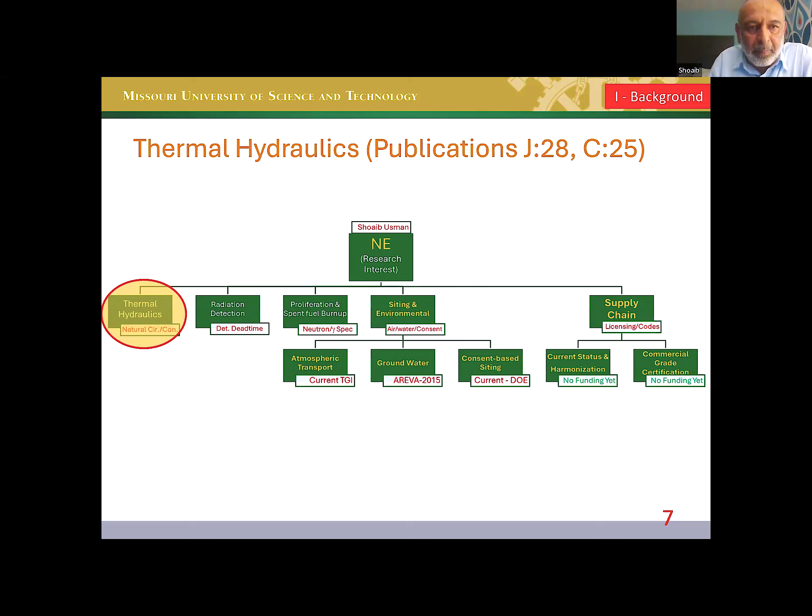This is my area of research. On the top, you will see the number of publications in different areas. Thermohydraulics has been one of my major areas, followed by radiation measurements and detection, and spent fuel interrogation. Both of those involve radiation measurements and improving the quality and performance of radiation detectors. I have not made any detectors myself, but I'm very well aware of their performance.

Another area of my interest is heat transfer enhancement using twisted tape or other techniques. Some initial results: axial temperature profile at the top, radial temperature profile at the bottom.

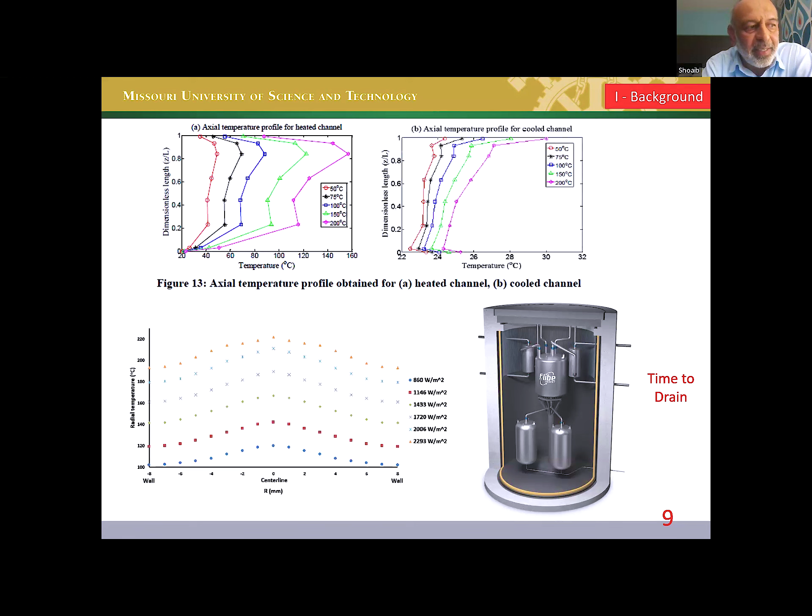Recently we are working on new reactor concepts using molten salt as both fuel and coolant. Our interest is on time to drain in case of an accident. The plan is that from this critical configuration of the reactor fuel/coolant, it will drain out to a subcritical configuration. How long will it take to drain out? That will really dictate how much heat needs to be removed in the subcritical configuration.

The other area is radiation measurements, radiation detection, which is of interest to this audience. There I am more interested in detection dead time, meaning when one pulse, one event, is registered in the system, we will talk about that in more detail. There is a dead time during which another event, another radiation interaction, cannot be recorded. That has influence not only on the count rate, but spectral convolution will take place.

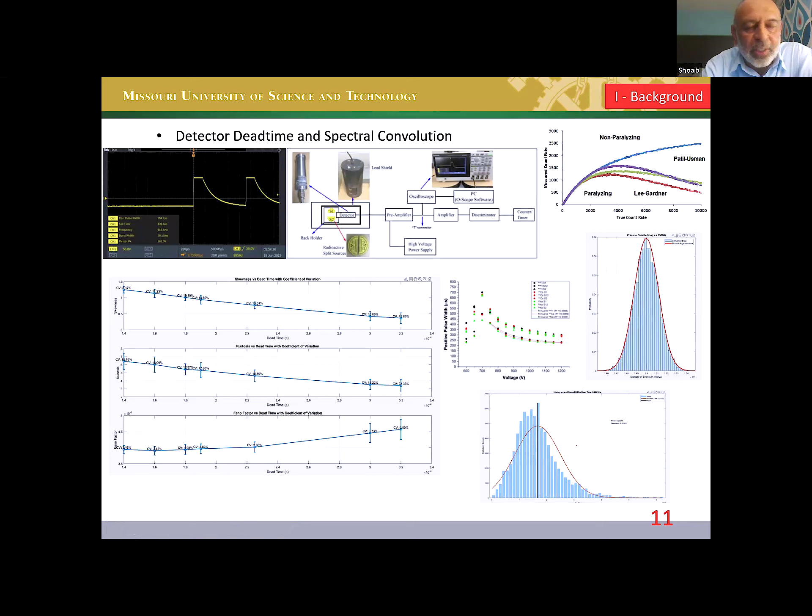So these are some of our results. We have a series of 10 to 15 publications in that area. Most recently, we are working on the statistical degradation of Poisson, so there will be a distortion of the Poisson distribution when radiation events arrive at the detector.

They are ideally Poisson, but as the signal passes through the detector, the preamplifier, amplifier, and thereafter, the Poisson statistics are impacted. Now we are looking at the variation, the change in the mean, kurtosis, skewness, and Fano factor, and how they are being impacted, and from there really predict how many counts are lost.

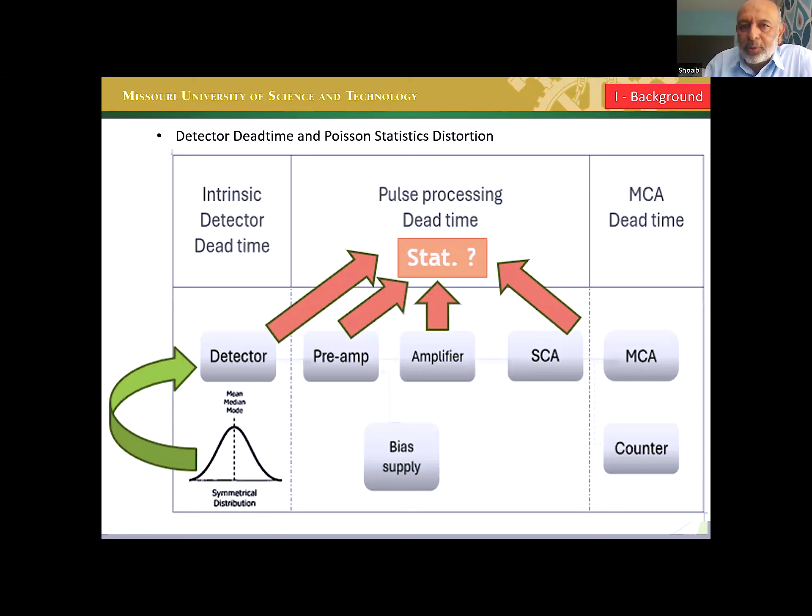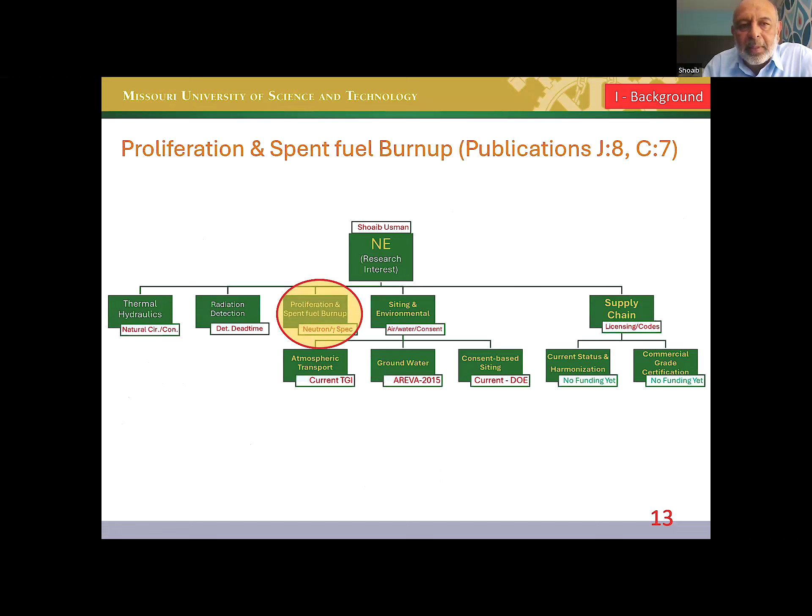The other area is proliferation and spent fuel interrogation, anti-proliferation tool development. These are our results. In the middle bottom picture, we are the first to report multidimensional delayed neutrons. Delayed neutrons are usually reported in 6, sometimes 8 delayed groups, but with no mention of the energy distributions within each group. We are the first to divide each group into its energy distribution.

Some of those pictures are shown at the top. The spent fuel, which was older than the newer one, shows how that spectrum will change, how the neutron energy spectrum will change.

The bottom left-hand corner is showing the core configuration of our campus core and the beam, neutron beam, and the detector at the very end. Using this beam, we were recording the neutron energy spectrum.

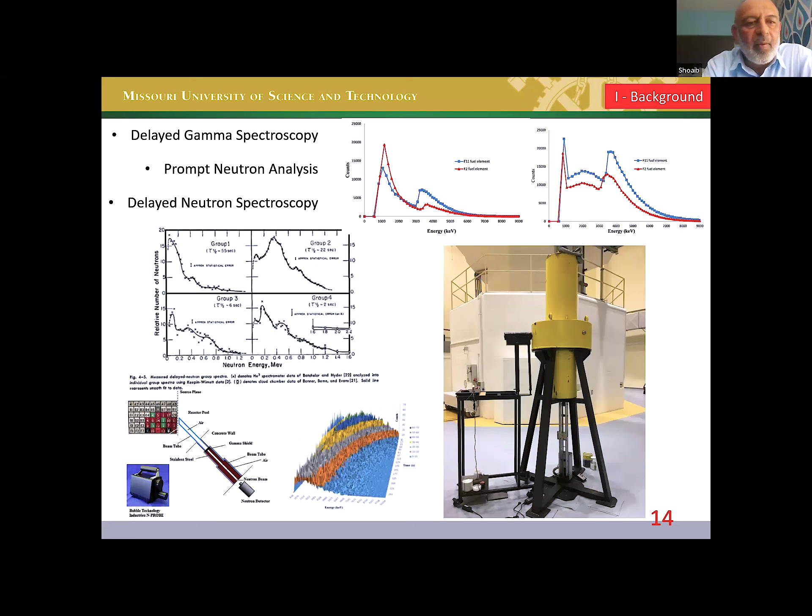So all of those were our capabilities, but fortunately or unfortunately, he left the program and started at our campus as a faculty, Typhoon. So he had to leave this apparatus behind. We will be rebuilding it together on our campus.

The next area is radiological pathway analysis. We are looking at atmospheric transport of pollutants, and surface water and groundwater. My focus is only on atmospheric and groundwater. Here are some of the experiments.

In the US, it is required by the NRC, the regulatory agency, that you collect 3 years of historic data before you can submit an application for a site license.

This means there is an inherent 3 years of waiting time. What we have done is use off-site data from airports and weather stations to build correlations, synthesizing off-site data to supplement on-site data, with very good results. As you can see on top, atmospheric stability is very well predicted.

No more than one stability class prediction difference, except for a couple of points like this one. The bottom right-hand picture is showing the rate of transport of strontium and cesium through groundwater.

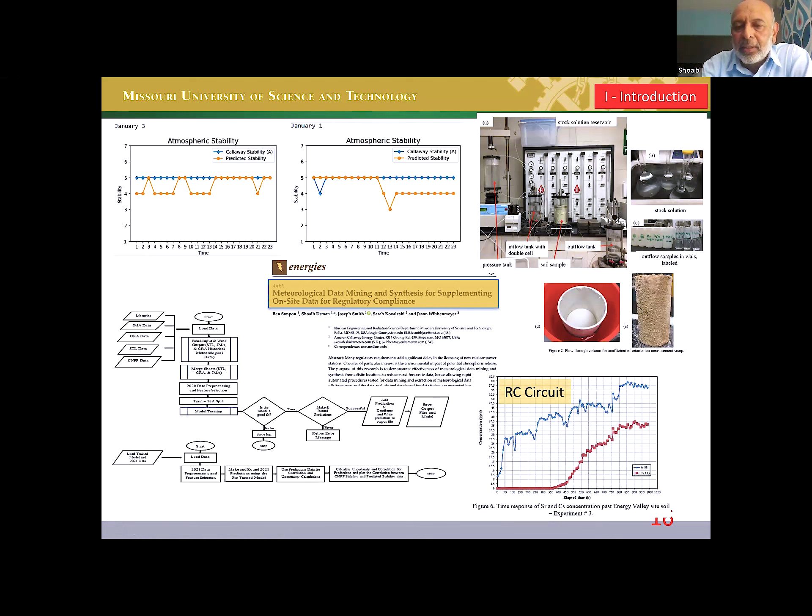What I'm showing in this picture is a typical RC circuit, and we are modeling the transport using an RC circuit analogy. The resistance to transport is the reciprocal of the hydraulic conductivity, and the capacitance of this equivalent circuit is the retardation coefficient, or distribution coefficient, of these elements in the soil and water composition present at that site. So the water chemistry has to match.

My other areas are not really related to measurements, so I'm not going to talk about them, but supply chain and understanding the codes and standards applicable to the nuclear industry is another area of my interest, though I won't spend much time there.

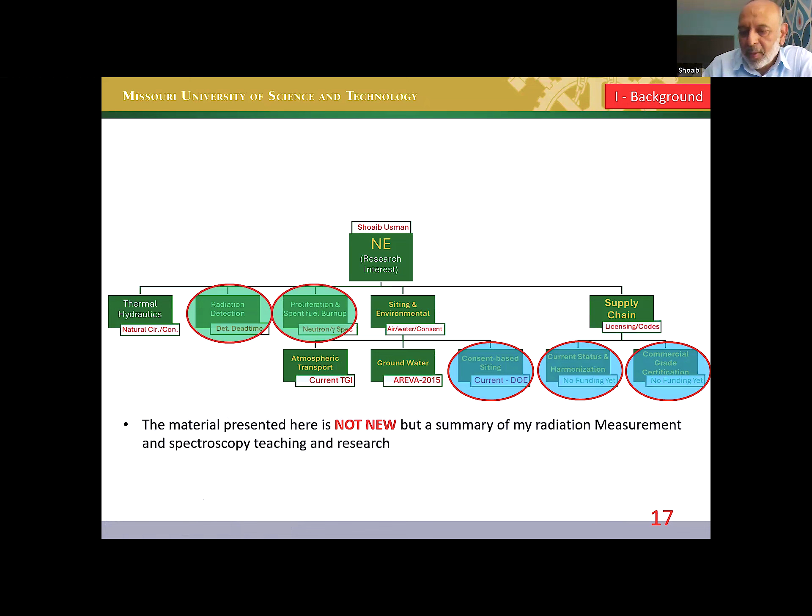Radiation measurement is no different. You need to understand the application, and with that application, the limitations, and then pick the right tool.

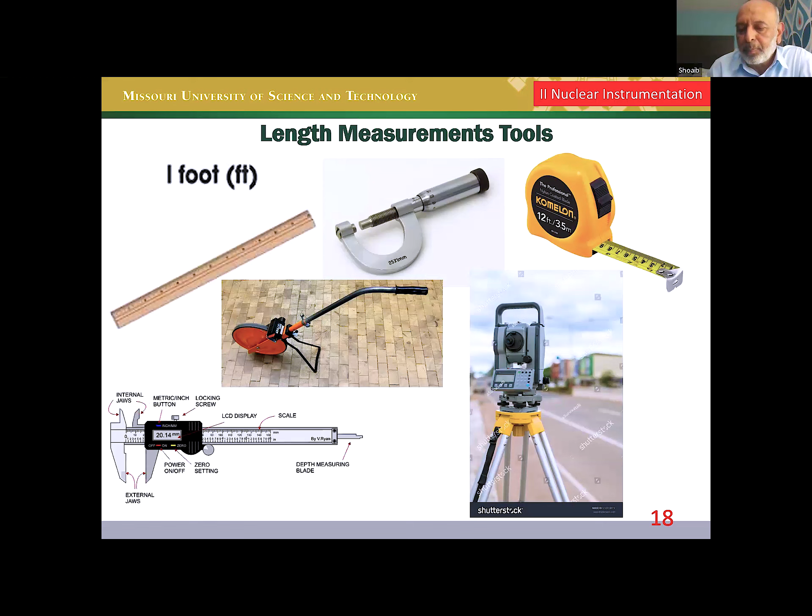I give this example very routinely in my class: measuring by a vernier caliper, marking by chalk, and then finally cutting it with an axe. It makes no sense to use your resources accurately measuring when you cannot mark it well, and marking it accurately has no value if you cannot cut it exactly where you want.

This is the reverse of that, and in all engineering measurement problems, one needs to know the limitation and the choking point in your measurements before you go forward.

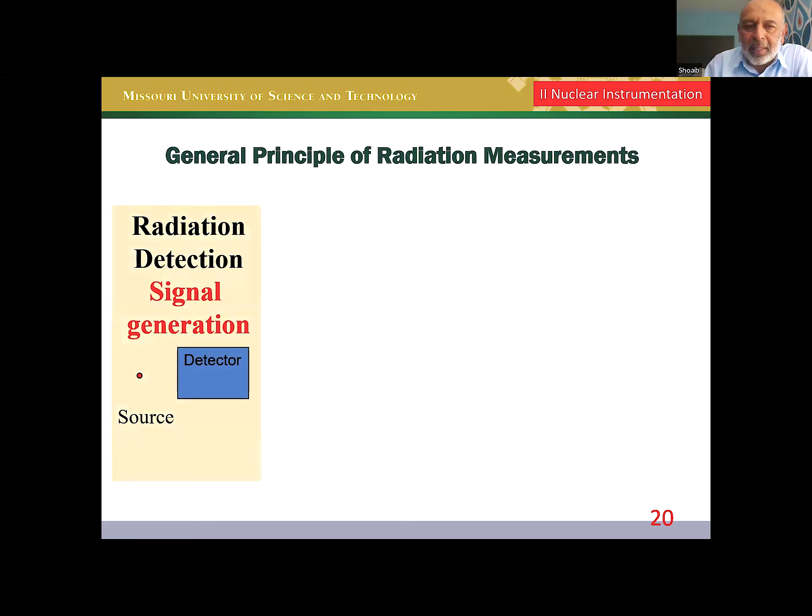So radiation measurements, many of you may know that the first step is the detector itself. Then comes the preamplifier and amplifier, where the signal from the detector is processed, and then recording it either in a counter, a multi-channel analyzer, or observing it in an oscilloscope.

The question is, if I have deteriorated my signal at the very first stage of the detector, there is no way I can improve that later on. Likewise, that's where the example comes that if I need a vernier caliper here, but my amplifier and preamplifier is not capable of supporting such high quality data, there is no gain in spending extra time or money trying to improve a signal which is already deteriorated.

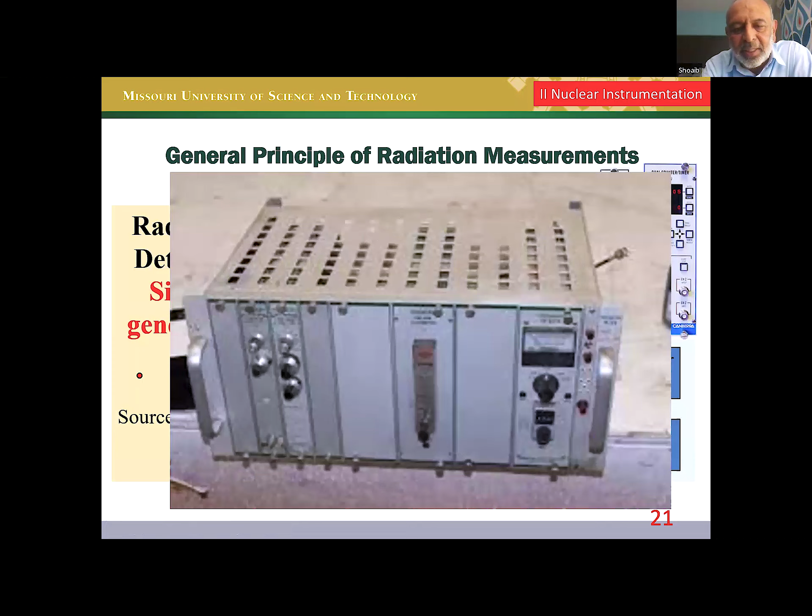So the detector usually generates a very faint, very small looking pulse. There are different choices for the detector depending on what you want it to measure, starting from gas-filled detectors to scintillators to semiconductors, and now there are some exotic scintillators coming. Anyhow, that signal now goes to the preamplifier where it is amplified, and a long tail is added to that.

So this is a tailed pulse after the preamplifier, and then in the amplifier, you try to shape that pulse, and then you take it out, and either you do its discrimination based on the pulse height, and do analysis on a multi-channel analyzer and sort these pulses based on their height, which is MCA, and then count them.

Now the question is, what are the characteristics that we are looking for with radiation detection? Are we just trying to detect whether there is radiation or not? That's the first level. Second level would be that we want to measure the intensity of radiation, meaning how many interactions are taking place per unit time in your detector. So you're measuring the intensity of radiation.

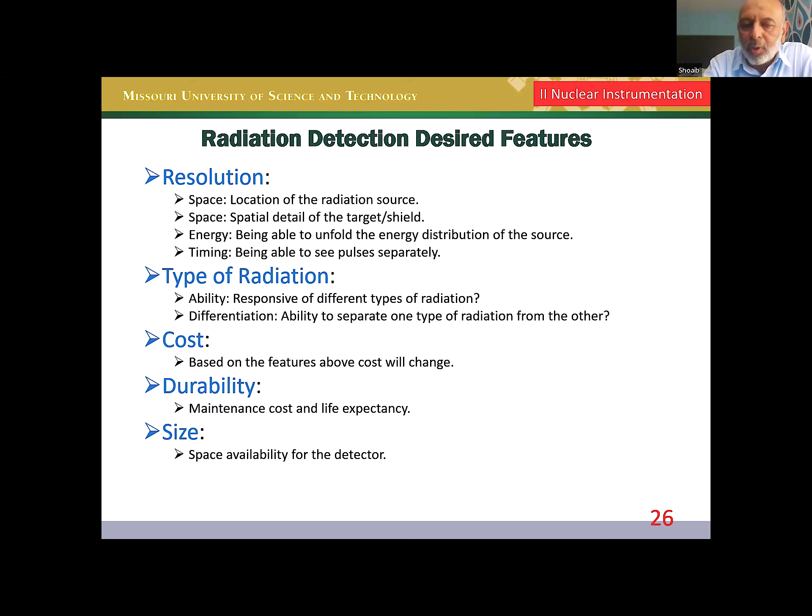So essentially it's an optimization problem. And like any other optimization problem, you do not solve the puzzle by looking at one side only. You will have to pay attention to all sides simultaneously, and their relative importance may change based on the resources you have available and the results you want to achieve.

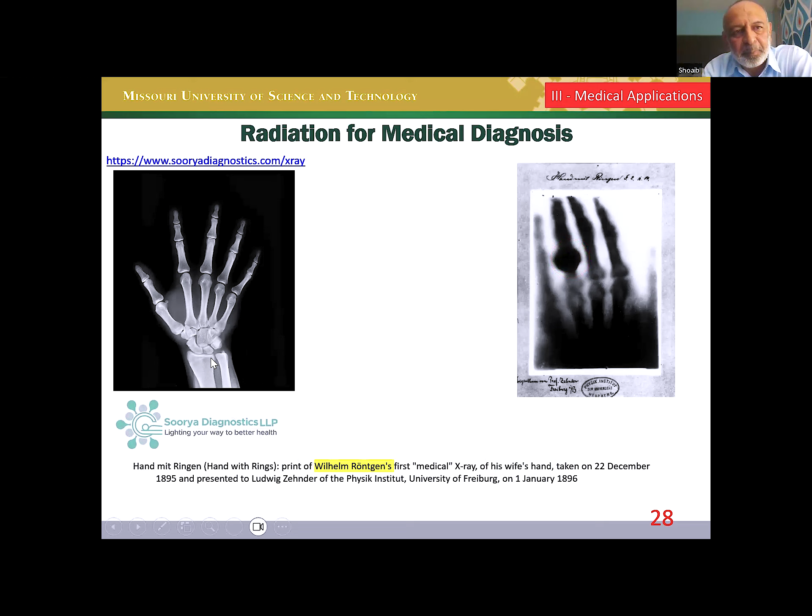Let's move on. So this level of spatial resolution is now improved into this, and you can tell the world of difference in the spatial resolution from the first picture to today's X-ray. And this is, of course, a picture. As an honest scholar, I would like to give credit to where these pictures are coming from. So, spatial resolution improvement.

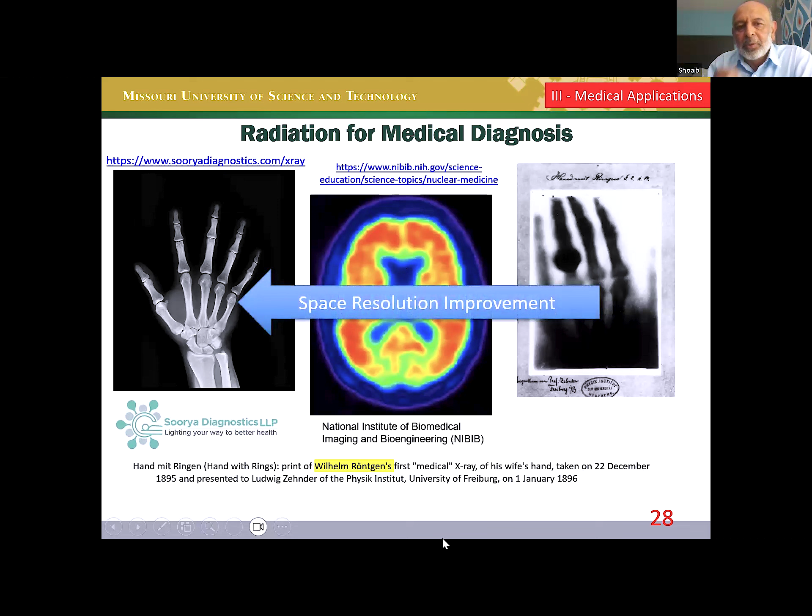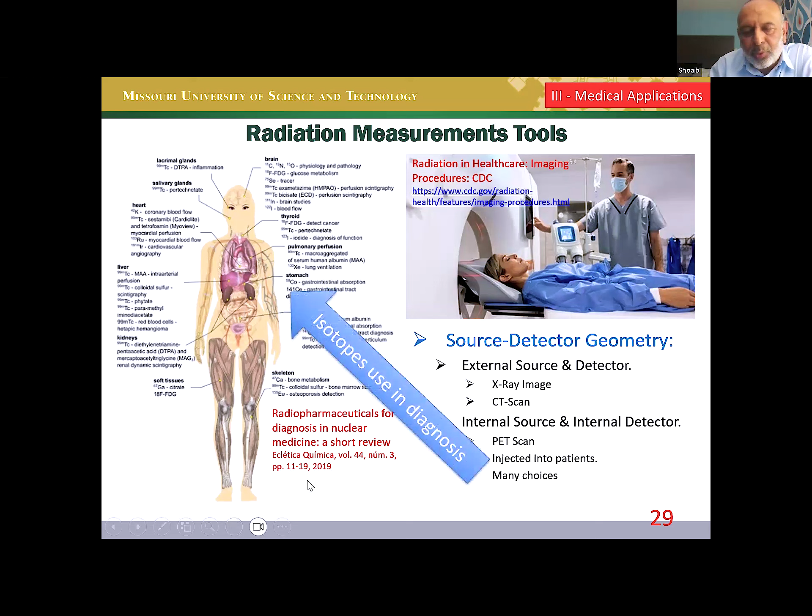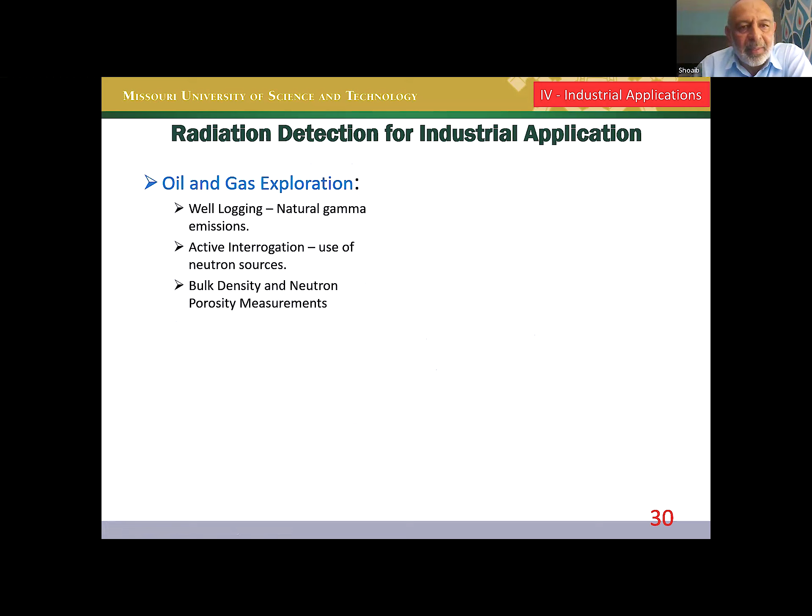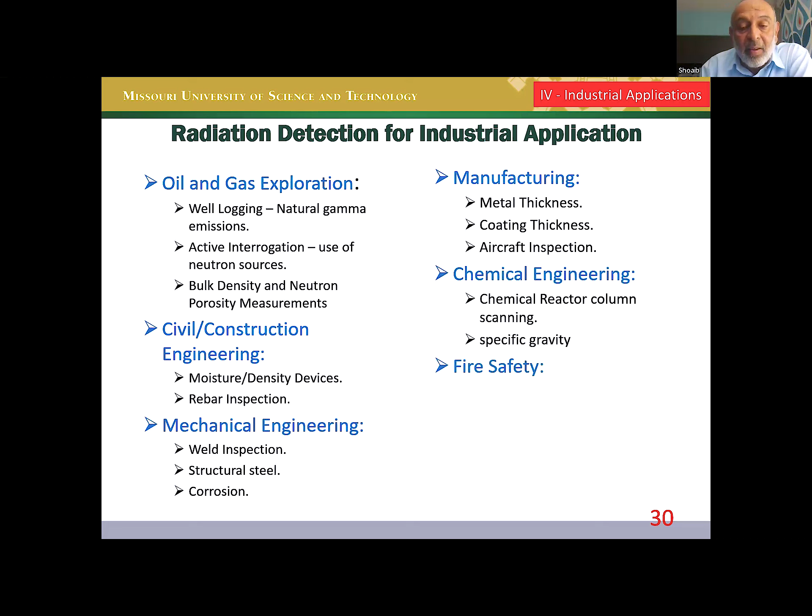Industrial applications, before we go to the reactor itself: oil and gas industries use it for well logging, active interrogation using neutrons, bulk density and neutron porosity measurements. Civil engineering, we use it for moisture contents and rebars in RCC construction. Mechanical, we look at welds using radiation, structural steel, corrosion. For manufacturing, we look at metal thickness, coating thickness, aircraft inspection. Chemical industry, we look at chemical reactor column scanning and specific gravity of their chemistry. Fire safety, smoke detectors have radiation in a detector. Cargo, you've all been to the airport for screening there, customs and arms control. So these are the industrial applications.

As an example only, we want to look at nuclear reactors. The reason I'm talking about nuclear reactors is that I'm most comfortable with that. We have a reactor on our campus, and I have been teaching reactor labs for over two decades. So I will talk about that specifically, but I also teach classes on nuclear power plant licensing, so commercial reactors, what do they use. Then we will have some time to discuss the potential for developing new detectors, or at least using existing detectors, in a country like Pakistan.

Fission chambers, as the name says, fission is caused: neutron causes fission, and we count the pulses generated. Essentially you have fissile material next to the wall, radiation comes in, neutrons cause fission, one of the fission fragments goes into the gas, causes ionization there, and a pulse. Since the pulse is coming from a fission fragment, there is a lot of energy, roughly 100 MeV as opposed to a few MeV for gamma, we can draw a discriminator line so that only pulses above this pulse height will be counted, and you're only counting pulses generated because of fission.

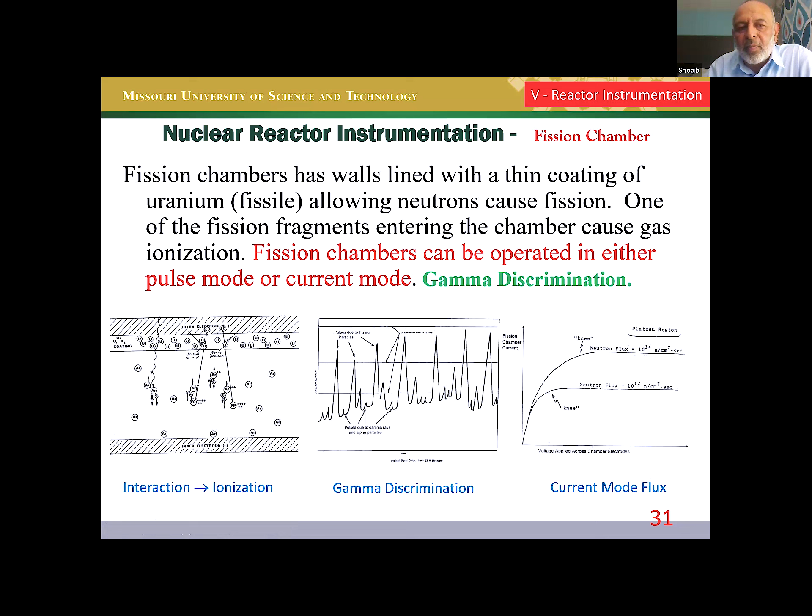In most cases, you use a fission chamber for startup in pulse mode, and then you move it away because you want to preserve your detector life when it is at full power.

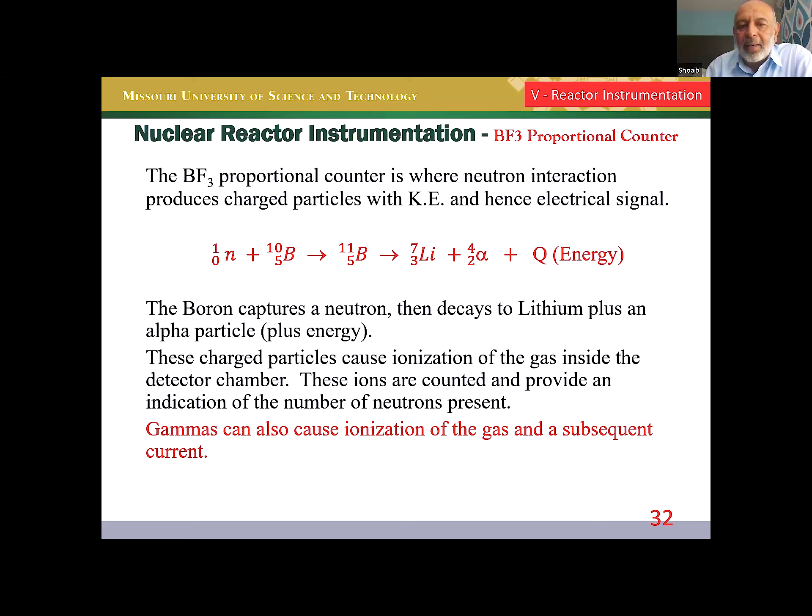This is the interaction taking place in a proportional counter. You have boron, in this case BF3 gas, interaction taking place there, and lithium and an alpha particle coming out. The alpha particle has some energy, it will cause ionization of the gas, pulses are generated, and you count that or operate it in current mode. Gamma can also cause ionization there, and there is noise because of gamma.

Now, ex-core instrumentation, meaning outside the core, not between the fuel elements. What are the options? You monitor neutron flux outside the reactor vessel or core. Initiate alarms and control signals rely on that. These are your ears and eyes in the core, telling what is happening there, and you rely on that in all decision making about the criticality and behavior of the reactor, relying on the signals you are receiving.

It provides necessary overpower trips in commercial reactors. So if there is an issue, there are statistical tools available where you start changing the weightage coming from different detectors, with the idea that if repeatedly there is a sudden change in that signal, you discount that signal.

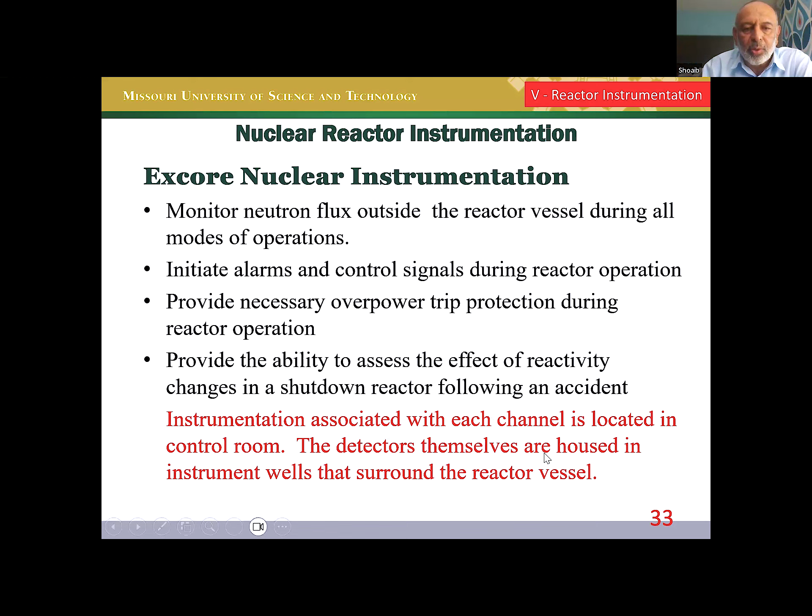So instrumentation associated with each channel is located in the control room, and you make measurements there for different stages of reactor operations, which means source range when you're just starting the reactor, intermediate range, power range, and finally wide range. I hope I'm not going over my time limit.

Otherwise, I can accelerate my discussion. You have six more minutes to give your presentation.

For source range, you usually use something in pulse mode. There is still a significant amount of gamma present there, so what you would do is ensure that you can discriminate against gamma.

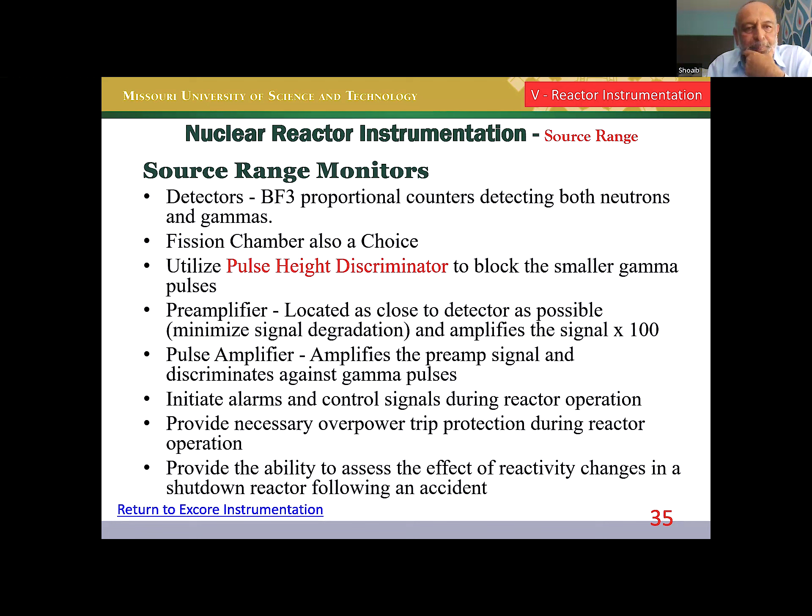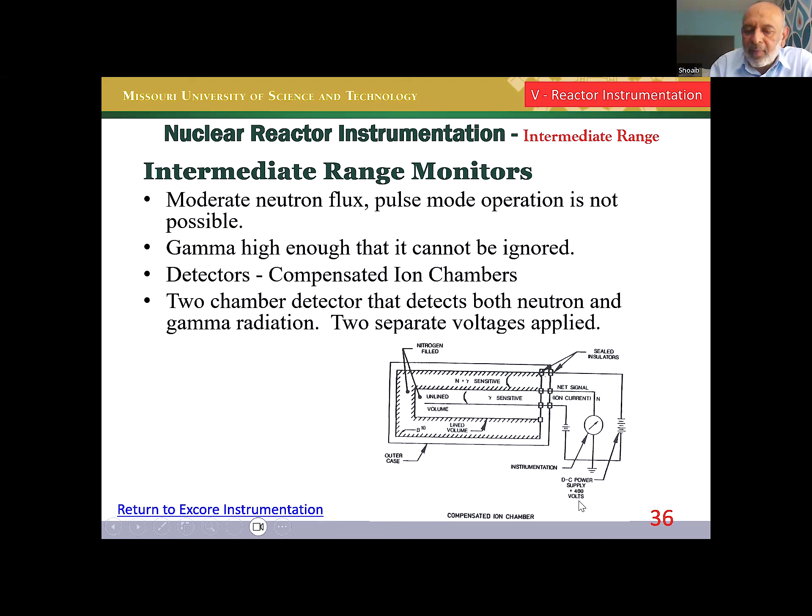In the intermediate range, there is significant gamma, but the neutron count rate is so high that you cannot operate it in pulse mode. So you would rather use it in current mode, and yet you need to discriminate against the gamma signal. What you do is put a compensated ion chamber where one of the detectors is lined with neutron absorbing material and the other one is not, and you subtract the current from the neutron plus gamma. The gamma current is subtracted, and this gives you the neutron intensity.

I'm not going to go into details of the operating voltage, but these types of detectors are called compensated ion chambers. For power range, neutrons are the significant component of the radiation and gamma becomes insignificant, so uncompensated chambers in current mode are commonly used.

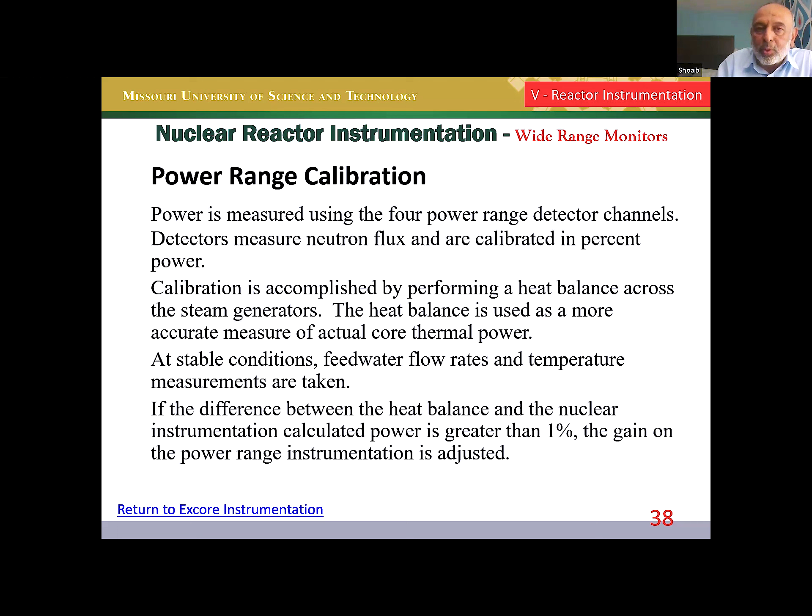Now you will have an array of that in commercial reactors. I will not go into the details of how they are distributed outside the core or within the core in some cases. And wide range, you want to cover 12 orders of magnitude variation.

I'm sorry, I'm going a bit faster. Wide range of operation signals: you can operate in both pulse mode for some level and then current mode, splitting the signal to drive the signal processors.

Now coming to the general area of what we can do in Pakistan. First of all, we need to know which area is already developed. Are the electronics well developed? As I said very early on, we don't want to be measuring with a vernier caliper, marked with a chalk, and cut with an axe. We don't want to do that.

So, assuming that all of this is well developed, then we want to know what is the need in this area. Is it reactor instrumentation, medical instrumentation? And then based on that, that type of detector needs to be developed.

So gas filled detectors are rather crude detectors. The type, the control on the gas composition is what matters, of course, along with the purity of the central electrode and the walls, making it stable.

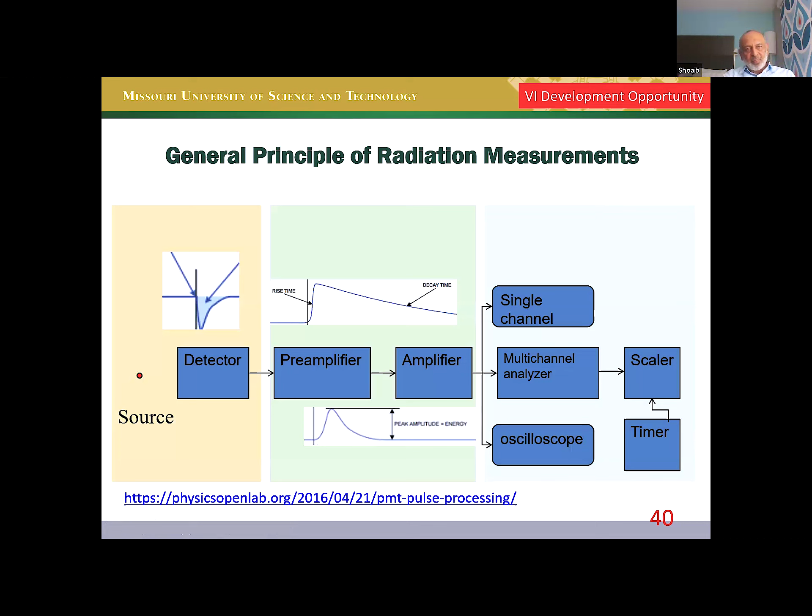If so, what is the quality of that? And what is the status of detection development? I don't know, but I'm very willing and enthusiastic to help in that process. In fact, I have visited NED several times to start a health physics program or medical physics program.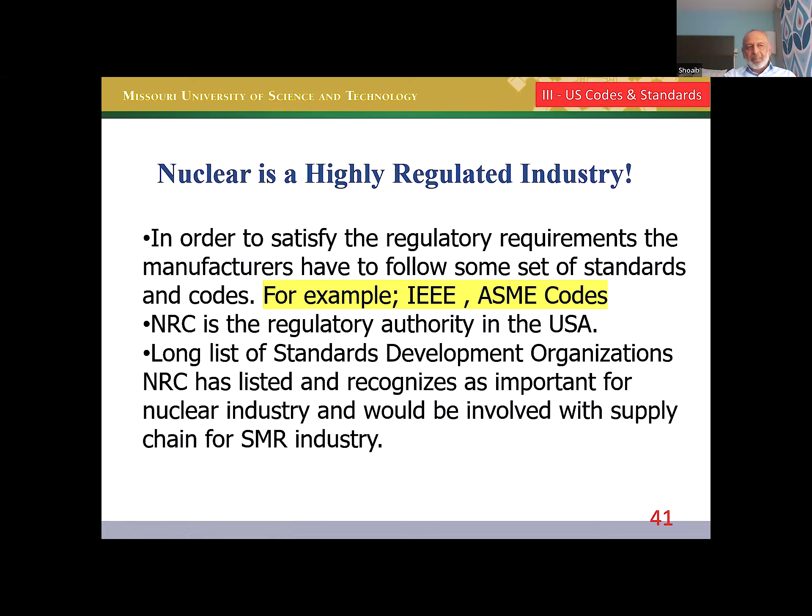These are some of the regulatory and standard development organizations. IEEE will play a significant role here.

But the most significant for me in 2024 was that we were blessed with two granddaughters, Yusra and Rayana, and these are my motivations to continue working and producing things. I want to leave a better world behind me for them.

So with that, I can conclude. If there are any questions—I'm sorry, I went a little bit too fast after asking the question, since I only had 6 minutes.

I wish we could hear you over 2-3 hours continuously. However, it was really great to hear from you and learning on radiation measurement and instrumentation. Thank you so much, Dr. Shoaib.

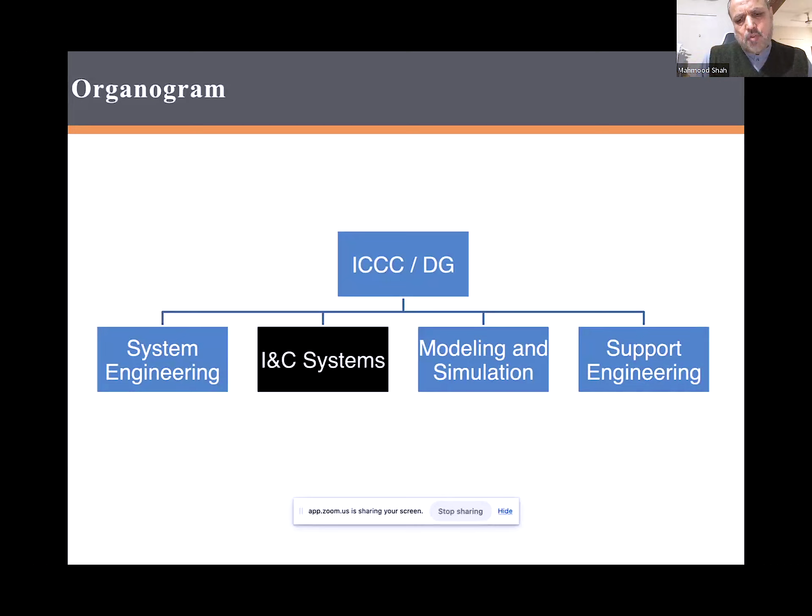Now coming to my directorate. System engineering is primarily focusing on robotics, some artificial intelligence, and they have significant contributions on our plants. Modeling and simulation includes the full scope training simulators for our nuclear power plants at the Chashma nuclear sites, which are our flagship projects. Support engineering is one of the directorates that plays a pivotal role supporting all other directorates for mechanical works and electrical works. But there are two key areas that will be of interest to the audience that I will talk about later in this presentation.

When it comes to my directorate, I'm Mahmood Shah, Director of Instrumentation and Control Systems. I have two deputy directors and one project director at the remote site in Chashma, at the Chashma nuclear power generating stations. Industrial control systems and plant automation systems look very similar, but they have distinct portfolios because we have a great number of projects, so the projects are divided horizontally and every division plays its role. In the electronics division, under the Deputy Directorate of Instrumentation, we are developing some indigenous products, very latest products based on FPGA, which we will talk about later in this presentation. And in process instrumentation, we deal with the measurement of pressure, temperature, flow, level, pH, conductivity, and so on.

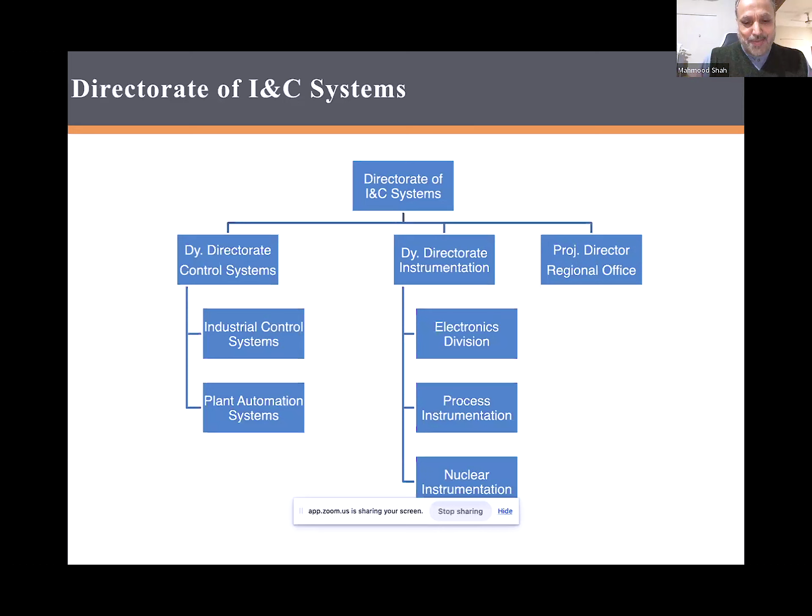Luckily, one of our divisions is nuclear instrumentation, and that will be very beneficial for Pakistan if we can have some connection with Dr. Shoaib. The field he's working on is very prestigious and very demanding for Pakistan. If the atmosphere allows—because we are facing some embargoes in this sector—we would request the university, and later on we will try our best to establish some connection, please.

Going first, our mandate—the mandate of my directorate: CNPGS Chashma Nuclear Power Generating Station and Karachi Nuclear Power Generating Stations are the biggest clients of our organization.

On the open side, our nuclear—basically we are a centralized ICCC. ICCC means Instrumentation, Control and Computer Complex. We are a centralized organization providing I&C services, systems, and technical support to almost the whole of PAEC.

On the open side also, we have 3 research reactors—2 operational, one under construction—and we have 4 nuclear power plants operating at Chashma Nuclear Power Generating Station, 1 in decommissioning stage in Karachi, and 2 recently commissioned and in operation. We also have a large number of industrial plants, chemical plants, and some other plants.

The scope covers both systems and services. When it comes to services, we are providing a big number of services. But one specific service I'd like to mention here.

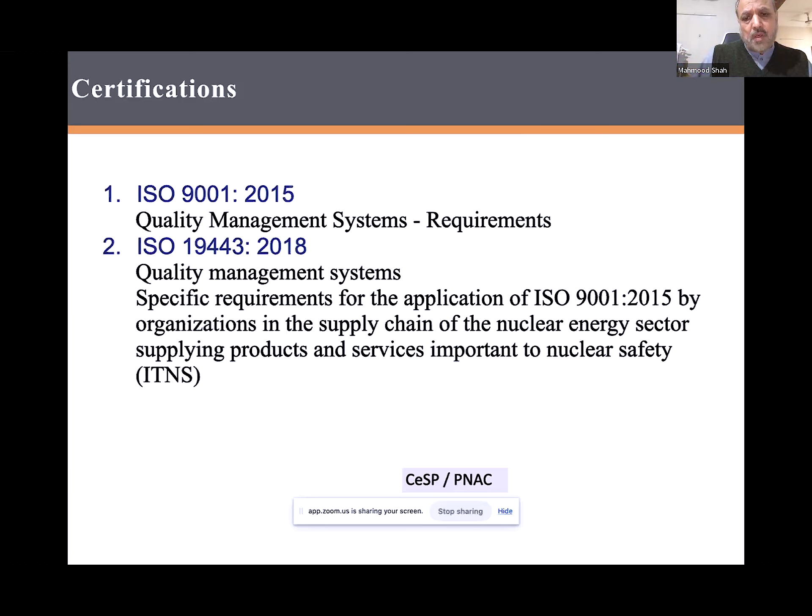ISO 9001 certification has been provided to our organization by CESP, Certification Services of Pakistan. So now PNAC is trying first to accredit CESP for the 19443 standard, and later on CESP will grant certification to our organization for this standard.

Overall, the experience our organization is having, particularly the Directorate of Instrumentation and Control, you can say that over the period of time, over several 2 decades, this directorate has delivered successfully, installed, commissioned, and operated 150 plus systems, we can safely say.

Instrumentation and control systems, particularly based on PLC or DCS, distributed control system, are normally measured in terms of IO, the number of inputs and outputs. The inputs can be digital or analog. When we talk about analog inputs, it can be a 4 to 20 milliampere current, it can be a voltage signal, it can be an RTD, it can be a thermocouple. Similarly, the output signals are also similar.

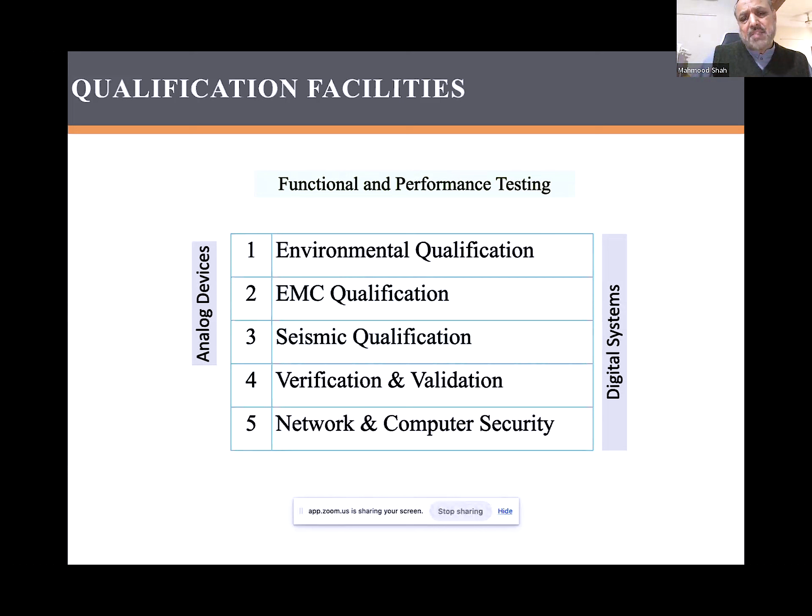Verification and validation, we have already talked about. And network and computer security is the same one we talked about in our previous slide, the cybersecurity. So if the device is an analog device, indicated on the left side, it only goes through the first three qualification tests. Digital systems are bound to go through all five qualification tests, apart from the functional test. The verification and validation, the functional tests, are rigorous and exhaustive.

Now, due to the changing situation in our country, and particularly the agenda of this forum, we have very recently developed a facility which we call FIICS, Facility for Indigenous Instrumentation and Control Systems. In the previous slides, as you see, we are buying some PLC or DCS-based systems from international suppliers like Honeywell, Siemens, Yokogawa, Japanese brands, ABB, and so on. Now the strong emphasis is on indigenous development to have technological self-reliance and independence, and we are facing very serious kinds of international embargoes in this sector, particularly in this sector.

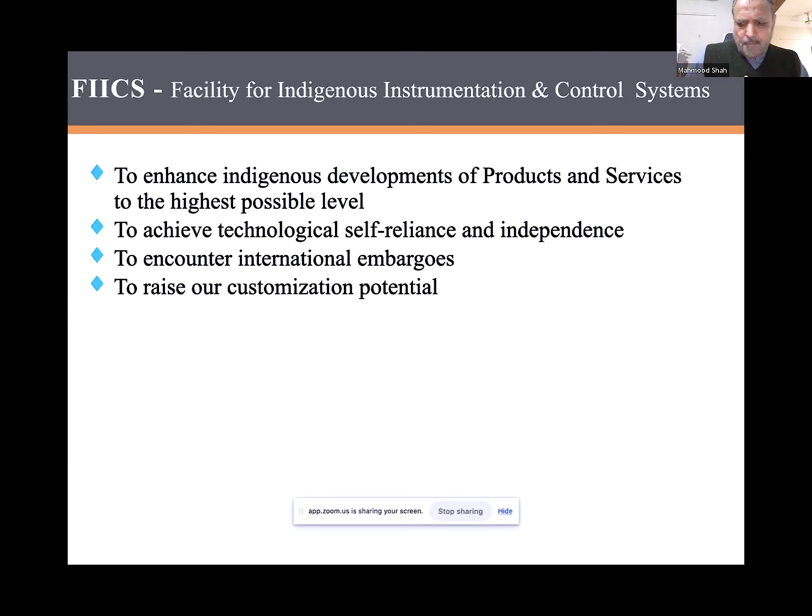Also, there is a thinking in the top management that we should raise our commercialization potential. So far, on the commercialization front, we are not active, but this facility is very recent, and what we are going to apply here is use this facility for customized automation solutions. These are the needs of our various plants - process instruments, for example, process instruments have been on track.

And the first process instrument that we have chosen is the pressure instruments. Pressure instruments, apart from measuring pressure, the differential pressure instrument can be used for measuring flows, and it can be used for measuring levels as well.

When we analyzed the pressure instrument, the different constituent parts, there is a mechanical enclosure. We have a very good sister organization in the field of mechanical manufacturing, one such organization is based in Karachi with the name NEW2, Naval Engineering Workshop 2, Karachi, which is responsible for making very fine, sophisticated, miniaturized mechanical devices or components or enclosures.

We have another one with the name SES, Scientific and Engineering Services in Islamabad, also called NEW1, Naval Engineering Workshop 1. And then we have HMC3 in Taxila, which is responsible for making very heavy mechanical structures. So for the mechanical enclosure of the process instrument, we already have an installed base. We don't need to make another facility.

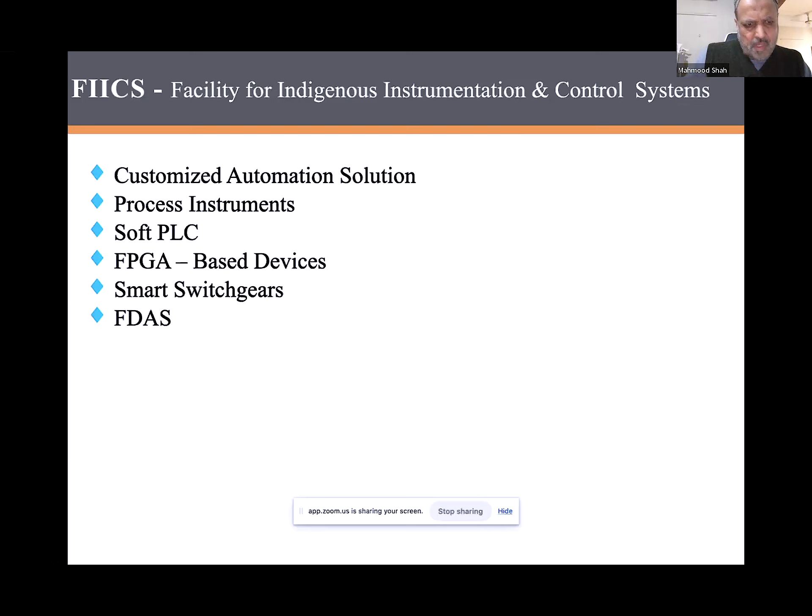This is my second lab. This is the NexSys architecture. On the HMI layer, we have a supervisory HMI software of our own, which we have developed with the name CoLoB, Configuration and Logic Builder operator station. And the data communication network is redundant. The controllers are redundant.

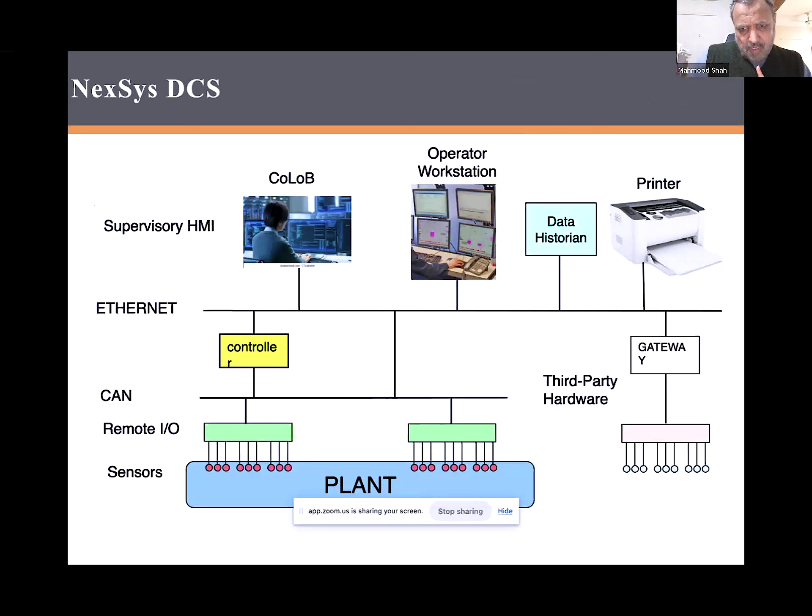And one of our other products is a fire detection alarm system, one of our indigenous products. The control panel with the name SHARQ, and the HMI software with the name SINOS.

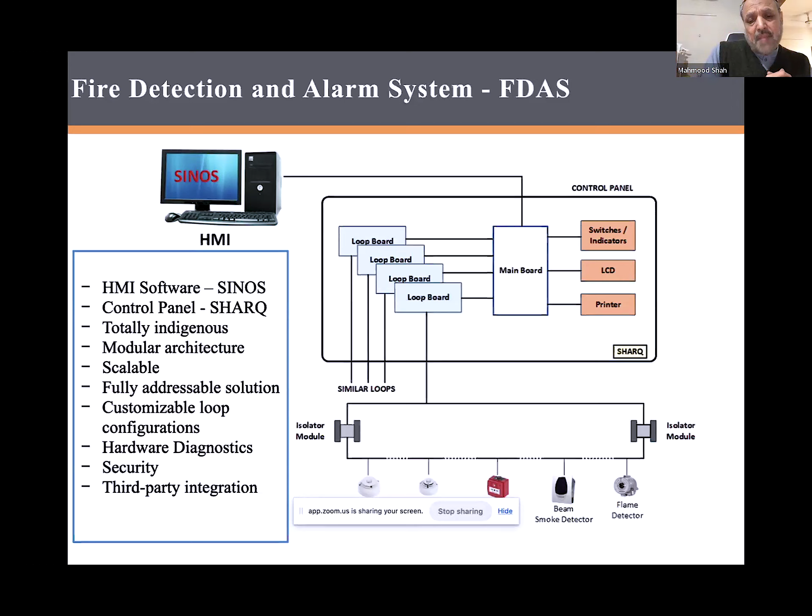So across our whole range of buildings in our state organization, FIICS is responsible for installing the fire alarm and detection system. The detectors we purchase off the shelf, and the control panel and the HMI software we provide from FIICS. Thank you very much.

Thank you. Two questions. Thank you very much. We are open for questions, and we'll start with questions from our president. Sir.

I've got two very important questions for you. Welcome, Mr. Mahmood, we are extremely happy to know that you have established FIICS.

I would like to know whether your FIICS is already established and operational. Number two, whether the facilities are accessible for civilian use. Whether you've got a website, who is heading it? These are the queries that I need answered.

As you know, we are a bit of a reserved organization. We are not very open, but the services are open for the whole of Pakistan. You can approach our headquarters the way you approached for participation in this presentation. We welcome each and everybody that needs it for civilian use.

Yes, anybody can have the facility. The FIICS I talked about is going to be in a lower security category. The process is already underway, and very soon we will ourselves inform you. Anyhow, even at this time, you can avail the facility. Anybody from Pakistan can avail the facility.

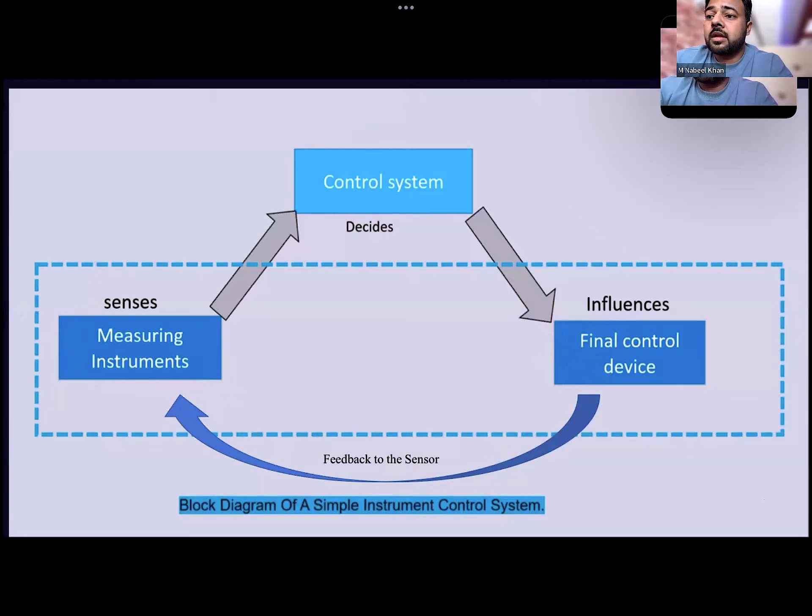More specifically, here's another example of how it's working practically. We have a level transmitter here, which is the sensor, as I was showing earlier in the block diagram, and this is the main parameter we are measuring, the level. Once the level transmitter senses the level, whatever the level is, it will give the output to the control part, the controller, where we give our set point, the desired level that should remain there. Based on that, the controller decides what it has to do. It gives the signal to the final output device and control element, whether it has to open the valve to maintain the level or close it to achieve the certain desired level. So that is the practical example of a level transmitter.

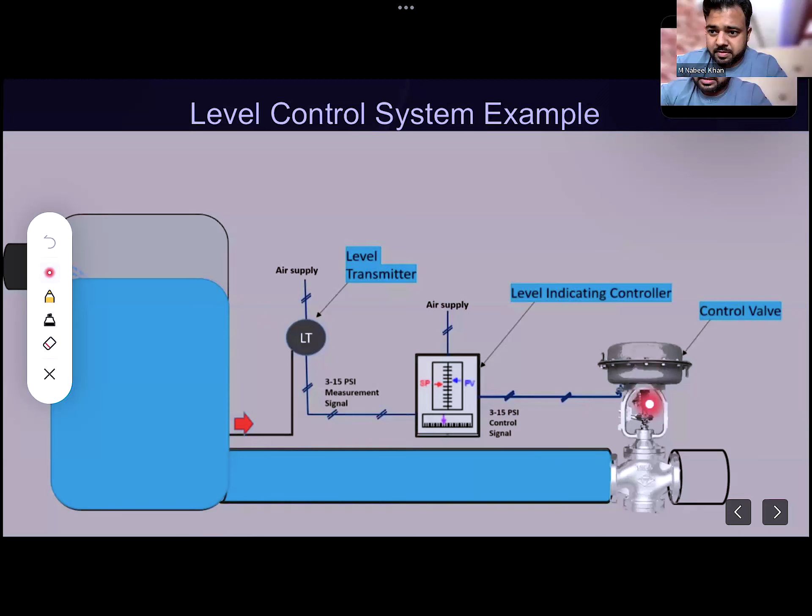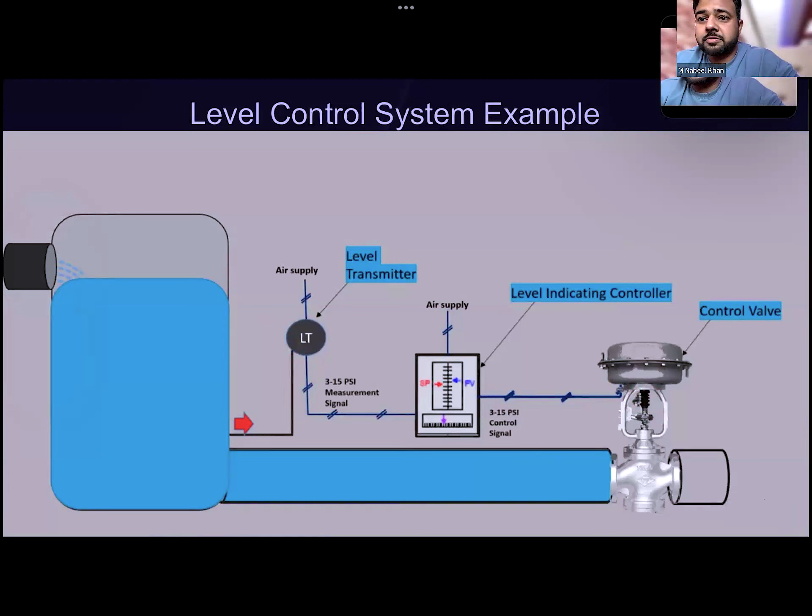Now, in today's world, we have all these things working in a single control device. The transmitter also has the capability to decide and work as a control system, and the final element also has that capacity to work as a level transmitter and directly get the value. But on the fundamental level, all these things work in this way. We have wireless transmitters and these type of things, but they will remain working on this same phenomenon. So this is the basic idea I wanted to add in this presentation before going into detail.

So the question is, who should choose this field? There are certain traits and personality a person should understand before deciding to give his career to this field. He should be passionate about technology, because every now and then we are coming up with new protocols, new devices, and new standards, so he should be well aware of these things. If he is interested in the latest technology, then he can better understand this field.

Then there's another trait I would like to add: problem solving capability. The person should have problem solving capability, enjoy puzzles, chess, and these type of things. If he has interest in problem solving with an analytical mindset, then this field of instrumentation suits him. These traits are a basic requirement for other engineering fields as well, but specifically for instrumentation it is highly recommended, because most of the time on the field you have to come up with some out-of-the-box solution, deploying new control systems to cater to and mitigate risk. These type of things require problem solving capability and an analytical mindset.

However, there are several devices and systems already available. You don't have to invent the new wheel, but you have to come up with the proper solution. That is the challenge we normally face in the field of instrumentation, which I have been facing all this time. So these are the basic criteria or traits a person should have, and then he can pursue a career in instrumentation very well.

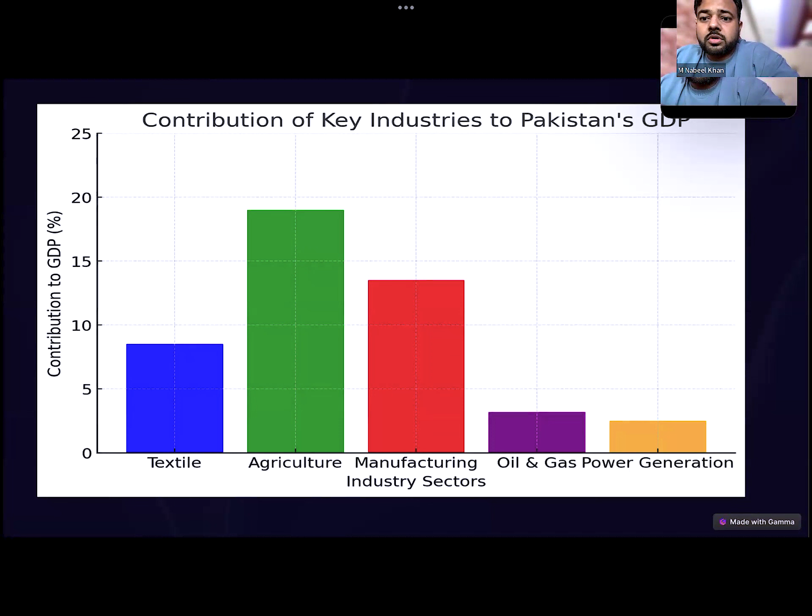We have universities giving specialized programs, like top university institutes. But we have to include projects in our curriculum linked directly with industry, not specifically on a theoretical base. Practical examples and practical projects make students learn more than theory. The programs are available, but universities need to update them and bring specific courses related to automation, cybersecurity, and Industry 4.0. These areas are very important these days.

We need to understand the new standards the world is working on, how data is transferring and working - it's not just about a simple sensor or transmitter. We have to understand what is going on in the world. This will help students' careers as well as help Pakistan's industry if they implement these things. I have no current update on exactly what the curriculum is, but we have universities with a good name working and giving courses for instrumentation engineering.

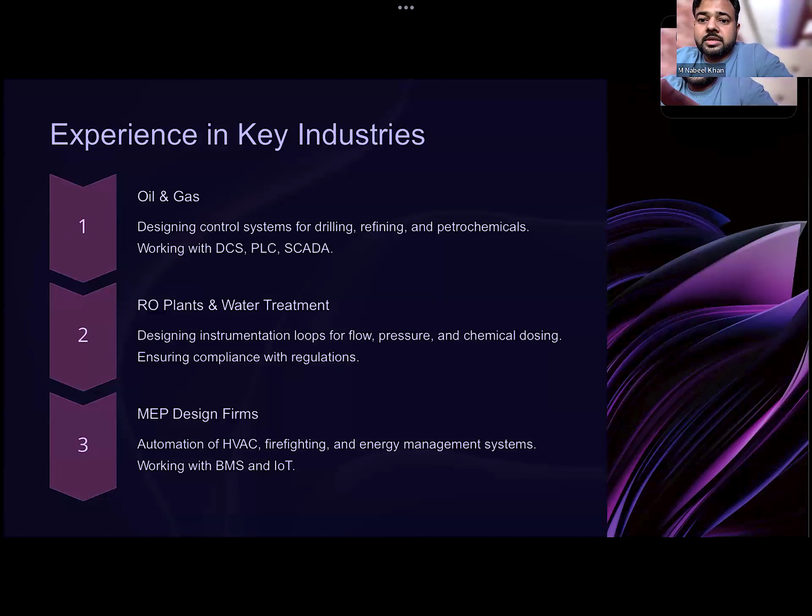This is another area of opportunity for instrumentation, and we have to encourage this domain and deploy positions there as well. Then there's MEP design - mechanical, electrical, and plumbing - and BMS firms. Many buildings have automated fire alarm systems, BMS data, energy efficient lighting systems, and IoT-based building data. These types of automation and instrumentation are also included in building management systems, giving opportunities for instrumentation engineers. These are the areas I have experienced, which is why I included them in this presentation.

So what's next is job roles for instrumentation engineers. We need to understand what roles are available in the market and industry. Starting from a basic technical role like instrumentation control engineer, you can start there, and later specialize in PLC, SCADA, or DCS systems. There are several different PLC brands.

If the industry is working on Siemens-based PLC, that is good for him. He can make himself familiar with the environment of Siemens PLC, the system, its programming, and all those. Then there are several DCS, so he can specialize in whatever DCS is working in his industry. So these are the technical tools related to instrumentation, like DCS engineer, PLC engineer.

Then we have automation engineer, overall automation engineer, not dependent on a specific brand. Then when we go to the specialized position, it's like system integrator, using different PLCs, different DCS, and how to communicate one brand of PLC to another brand. What modules are used? These type of challenges come when you work as a specialized position as a system integrator.

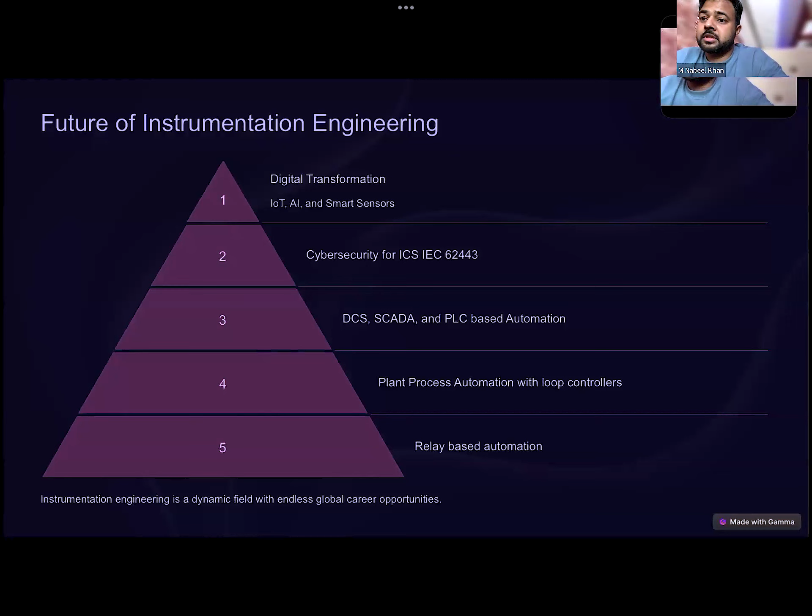However, these are going on and there are several courses available. If we enhance it more, it will help promote instrumentation and control in Pakistan. Then there are other aspects, like strengthening local system integration companies, encouraging local firms to design and implement DCS, so that we reduce dependency on foreign equipment, machinery, and services.

So we can soon be dependent on our own manpower and engineers, and the government has to play some role to provide incentives for companies investing in automation solutions, because ultimately it will give overall productive output for that particular industry.

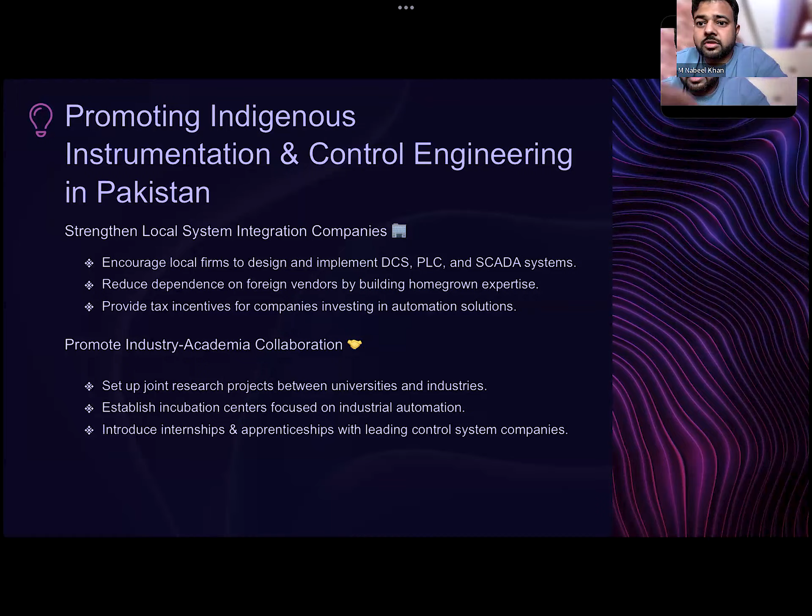Also introduce internships and apprenticeships with leading control system companies. We have to ask main OEMs like Siemens, Honeywell, Yokogawa, Schneider to come and give projects to industry or academia students. Then government support and policy reform.

We should not ignore this. This is the main thing we require: create a national strategy for instrumentation and control. In that way we can promote instrumentation and control in our country, implement local sourcing policies for how to source instrumentation projects, and fund pilot projects to showcase Pakistan-made automation solutions.

These are the steps the government should take to promote instrumentation, and to increase awareness and professional networking, organize conferences like this one. This is a very good session that we are having, giving so much information on this topic.

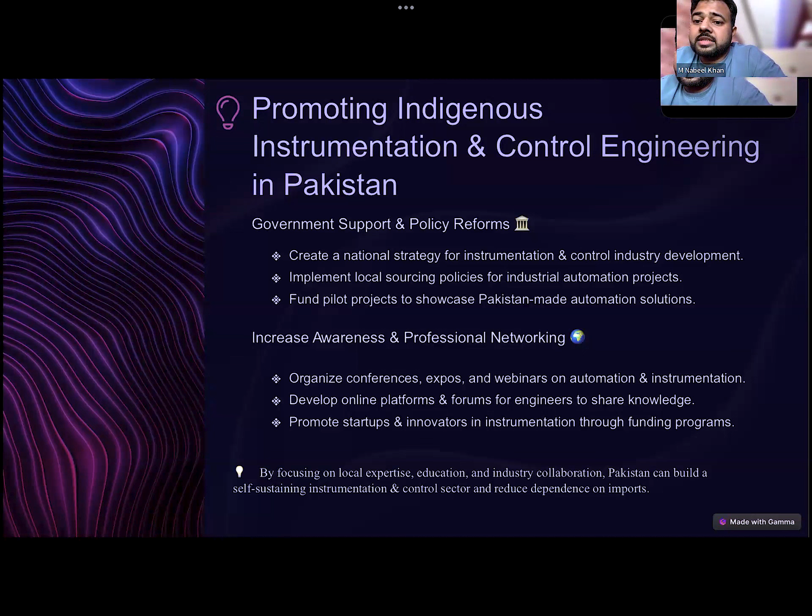Webinars related to automation and instrumentation, developing online platforms, competitions like programming competitions or project pitching - these types of things we need to promote in the circle of professionals. This will also promote instrumentation, and by focusing on local expertise, education, and industry overall, we can promote sustainable instrumentation in the country. So this is from my side, and I hope I have covered more on this topic.

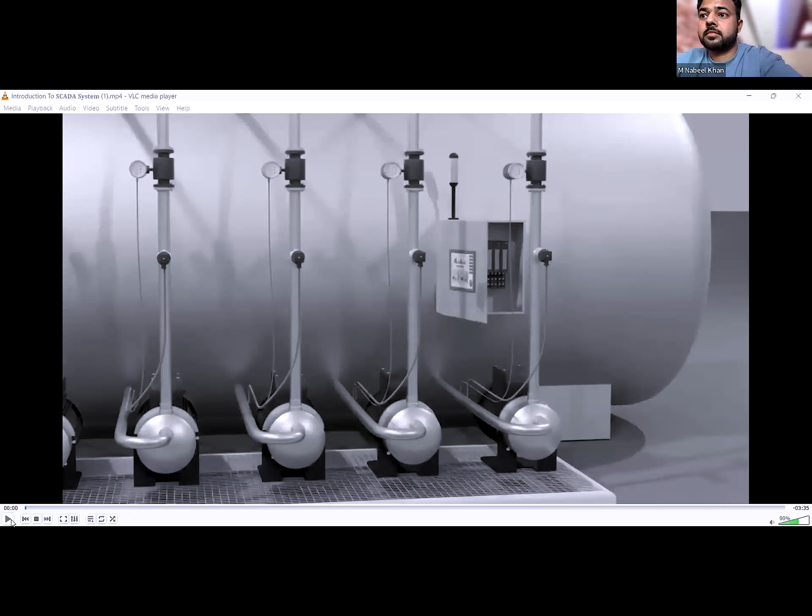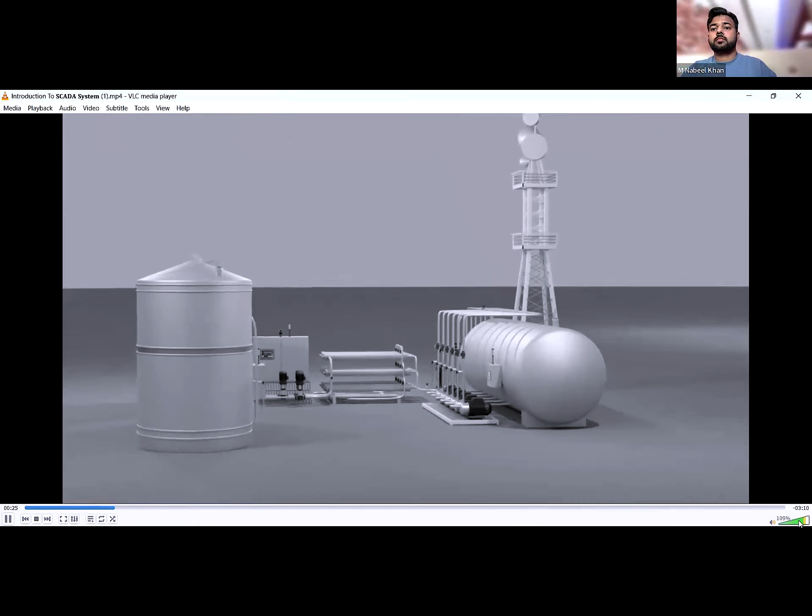Welcome to another video on IT and Automation Academy. Today, we're going to explain SCADA in a super easy to understand way with the help of animation. I want to understand what SCADA is. So, what is SCADA? SCADA stands for Supervisory Control and Data Acquisition System that helps monitor and control different processes like oil and gas, power, and more. Before we dive in, let's understand two types of architectures: factory-centered and remote.

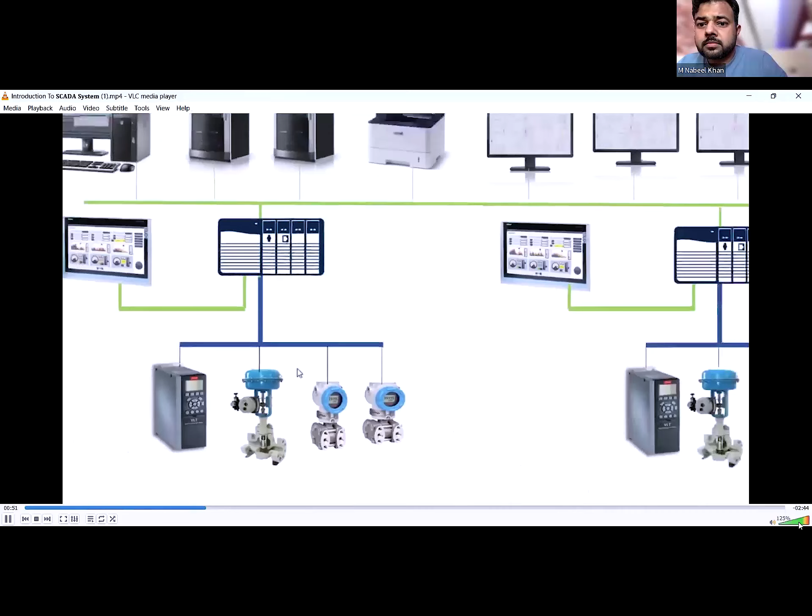Let's start with factory-centered SCADA. In any process, you need instruments like control valves, transmitters, VFDs, and motors. These instruments collect data, which is crucial for making decisions.

Imagine these instruments as sensors in our body. They collect data about temperature, pressure, and flow, just like how our body senses heat or pain. This data goes to PLCs, which are like the brains of the operation. PLCs analyze the data and decide what actions to take.

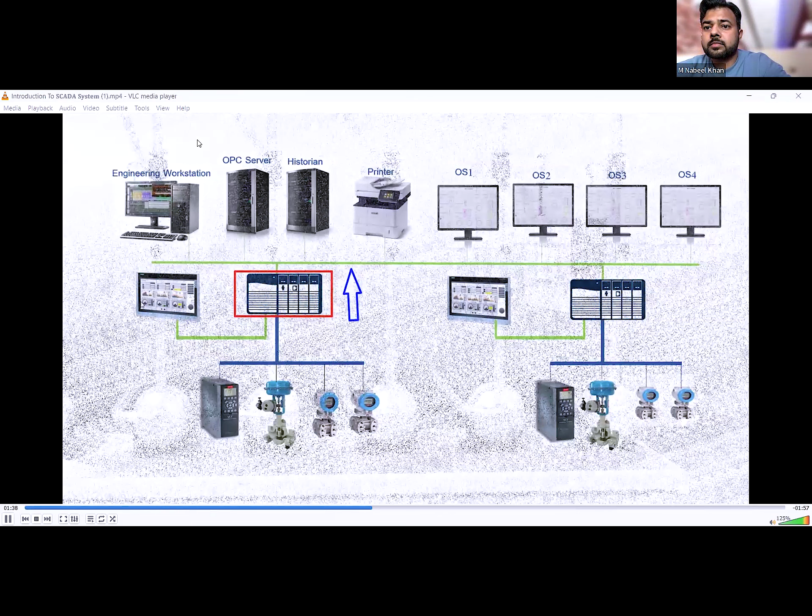For example, if some change is required in the process, PLCs send commands to final control elements like motors or valves to meet desired process requirements. So the PLC serves as the central processing unit of the SCADA system. It receives data from field instruments, processes this data according to predefined logic and algorithms, and sends control commands to actuators and final control elements. PLCs are highly versatile and can be programmed to adapt to different industrial processes.

Let's understand this with a super simple analogy. Imagine you're driving a car, and imagine if your car could drive itself. The autopilot constantly checks the information from the dashboard and makes decisions based on that data. For example, if it detects that you're going too fast, it automatically adjusts the speed.

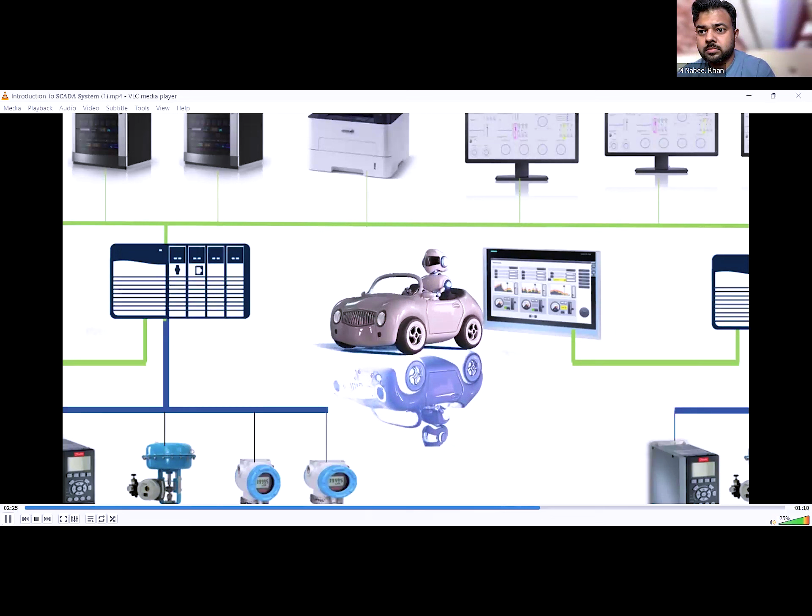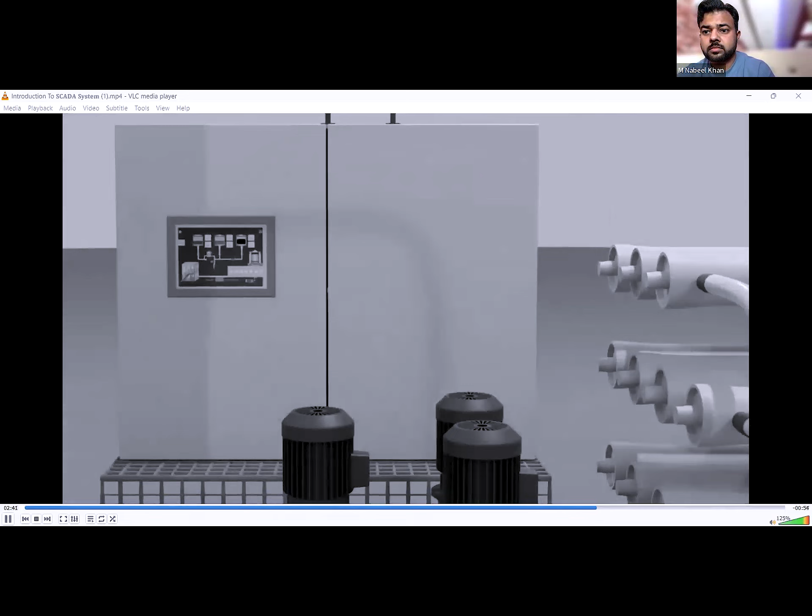When the autopilot decides that something needs to change, it sends commands to the steering wheel and brakes, the final control elements, to adjust the car's direction and speed. Similarly, in a process, if the PLC decides that something needs to be adjusted, it sends commands to motors or valves to make those changes. So just like how an autopilot guides a car safely to its destination, PLCs ensure that processes run smoothly and efficiently by monitoring and controlling various parameters based on the information provided by instruments.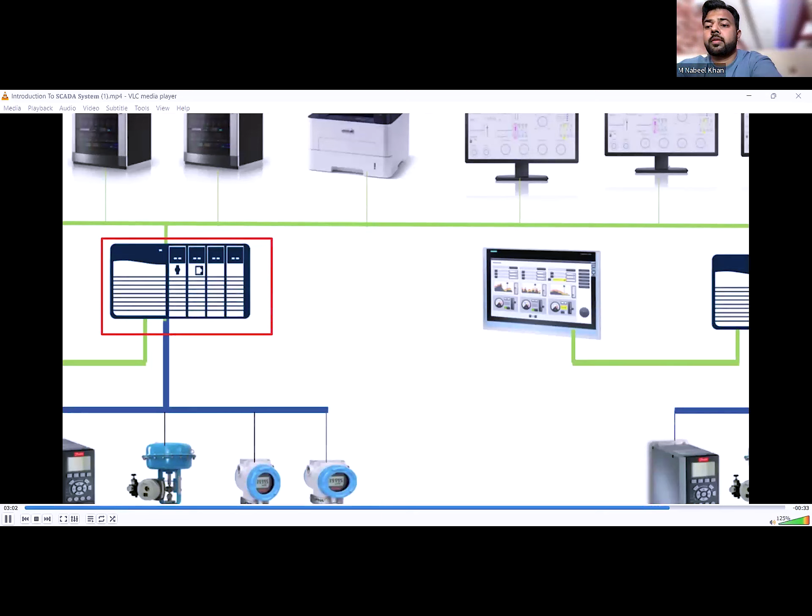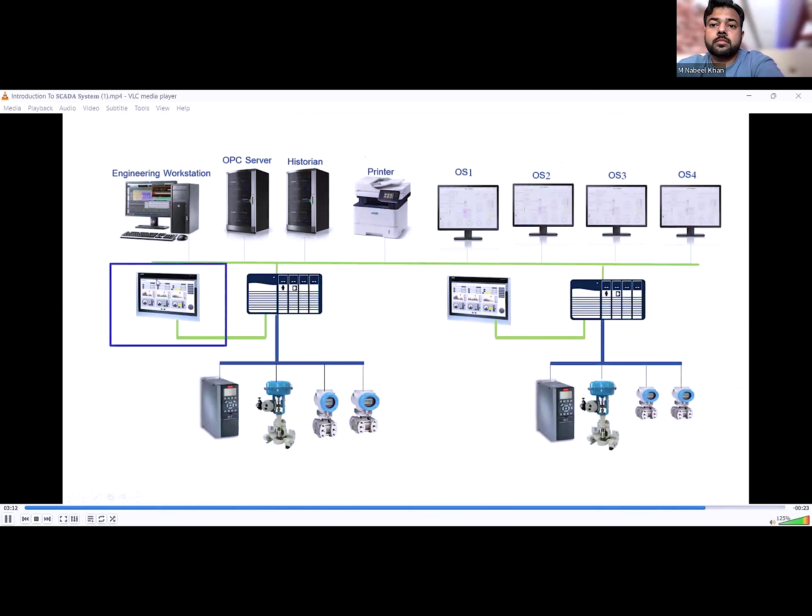In a PLC, you can't directly observe the ongoing processes or the temperature within them unless you establish a connection using your laptop or access it online. Alternatively, you can link it with an HMI, which stands for Human Machine Interface. As its name suggests, an HMI serves as the interface between humans and machines. Through the HMI, you can visualize the status and values of various processes in real time.

Next is the Engineering Workstation. This is a computer system used by engineers and system integrators. What is industrial automation?

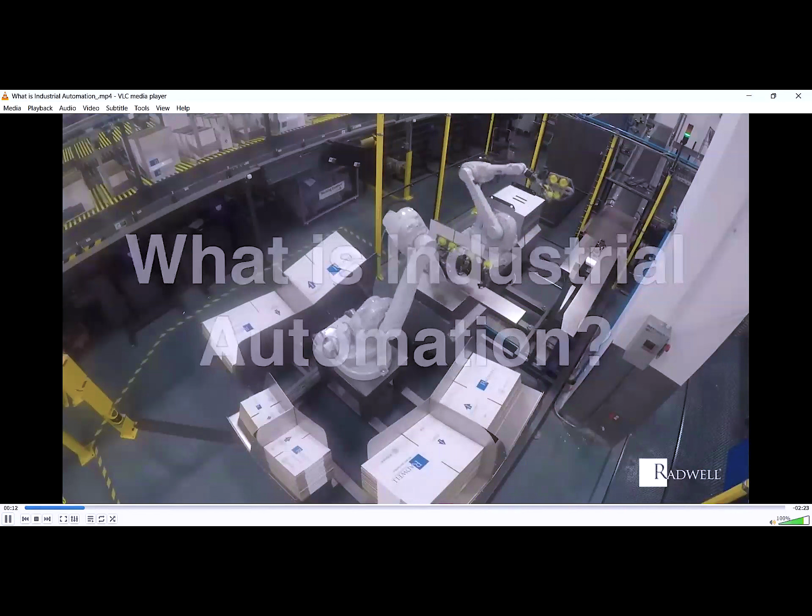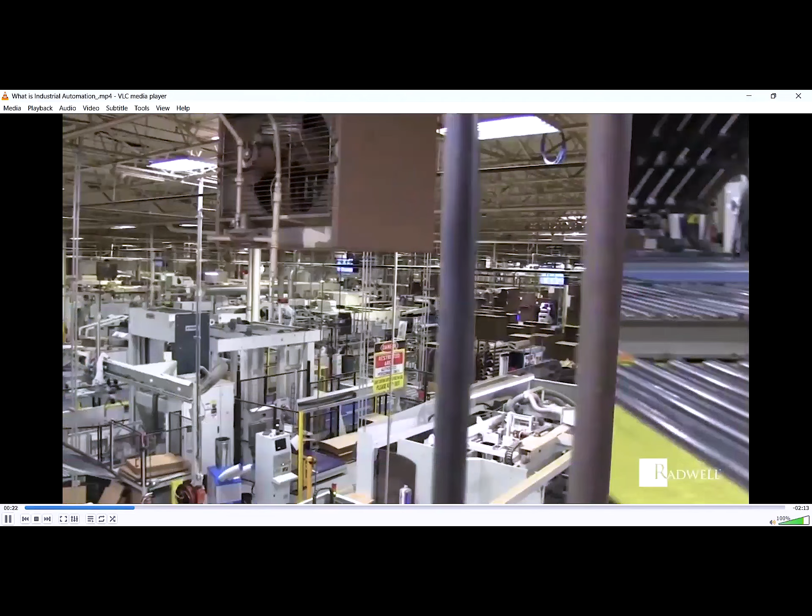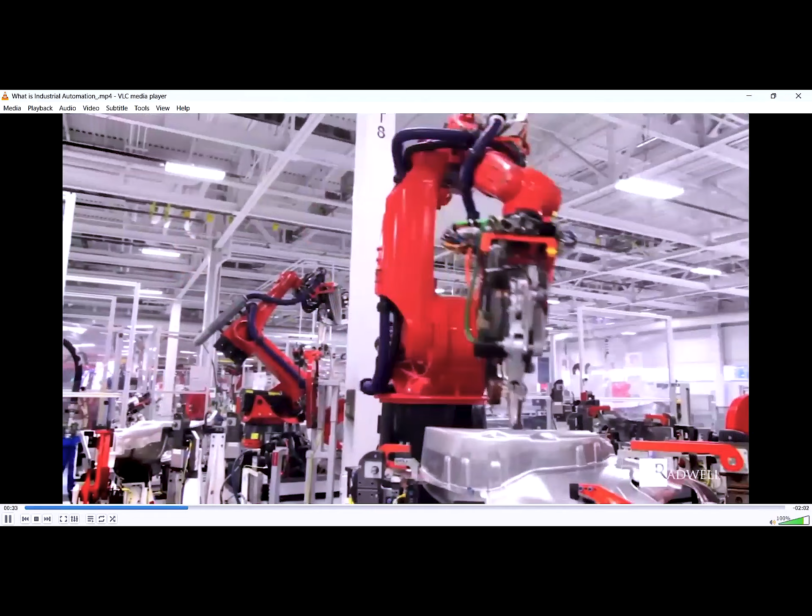What is industrial automation? Automation is the use of machines to carry out manufacturing processes with little human involvement. Industrial automation allows facilities to utilize these processes for more optimized operation. Manufacturers use machines that are operated through different control systems, like programmable logic controllers or PLCs, human machine interfaces or HMIs, and robotics.

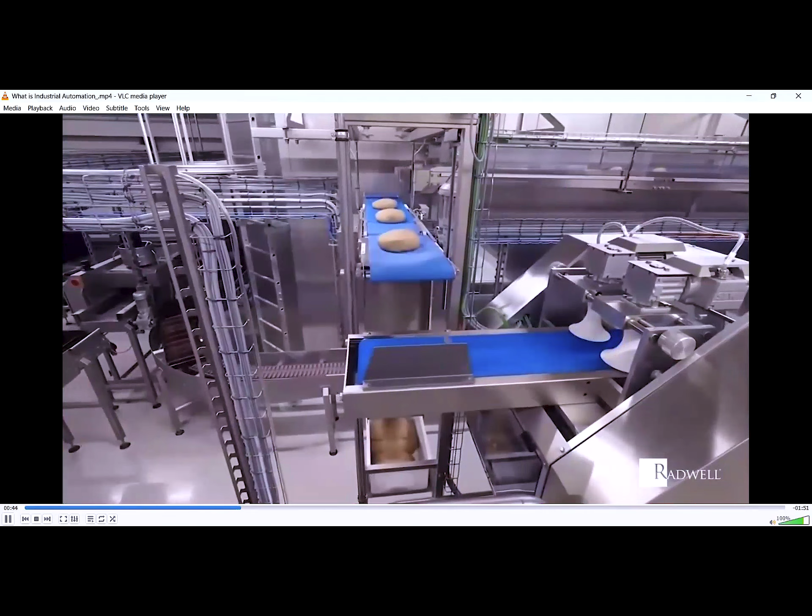Automation uses logic and programming to feed the machine information on how to carry out a function. These machines allow for high control, which improves manufacturing performance.

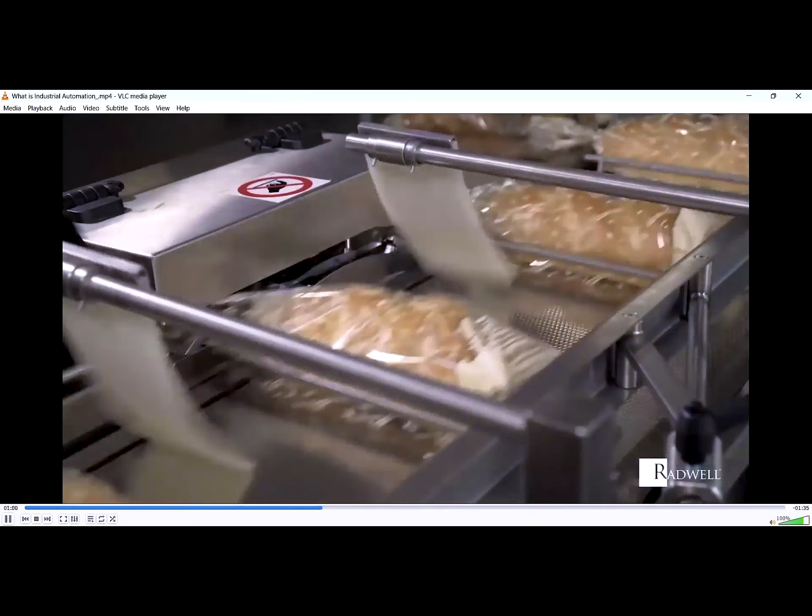There are a few different types of industrial automation systems. Hard or fixed automation is made for repetitive tasks with high turnout rates. Programmable automation is used for batch production, where the automation process can be modified. Soft automation allows for flexibility and changes to products quickly and easily.

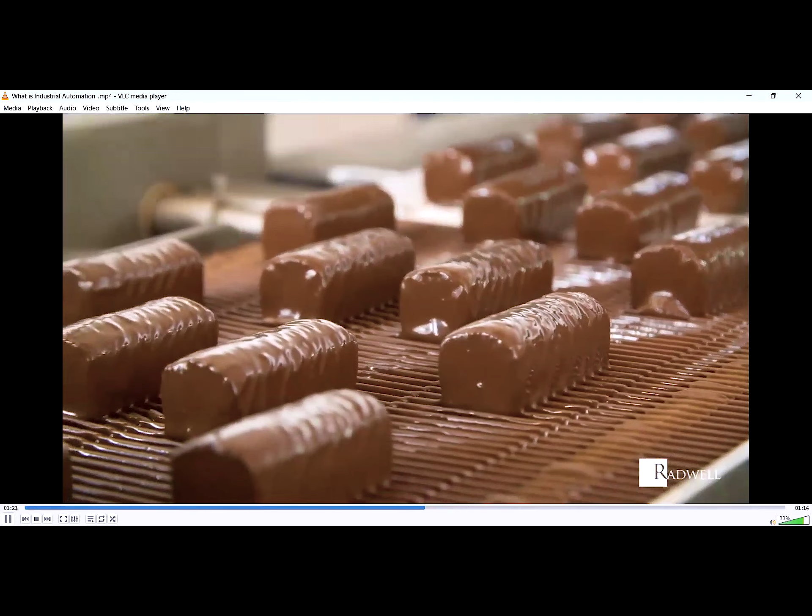Some of the benefits of industrial automation in a manufacturing environment include high reliability, increased productivity, quality enhancement, and reduced labor expenses. Industrial automation in a manufacturing environment may include various types of equipment.

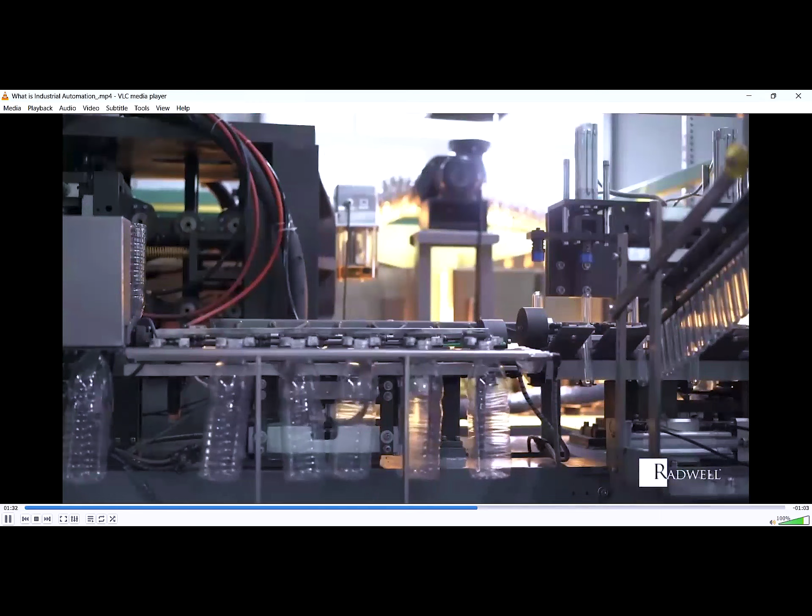Automated material handling systems, such as Swisslog AutoStore, are specialized, autonomous, and compact in size for fast inventory retrieval speed. These systems are customized for the environment and needs of the facility they are housed in.

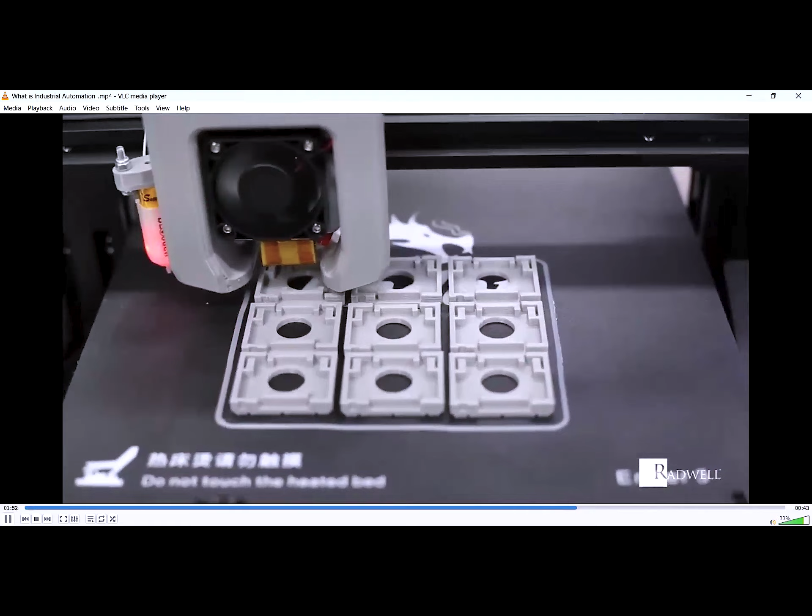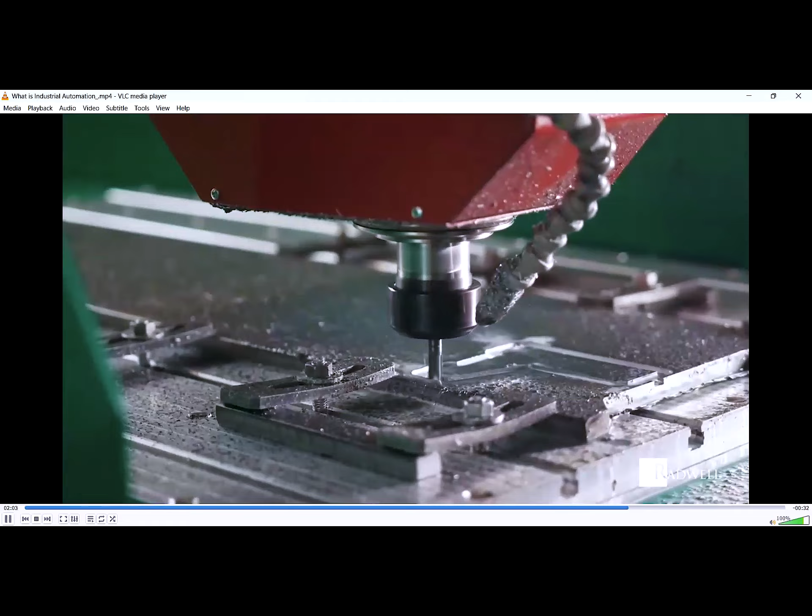3D printing machines allow manufacturers to create 3D models of particular items from a computer. CNC machines come in many varieties. To learn more about various types of CNC machines, visit the link in the description below. CNC machines can take material and reconfigure it into a precise form within the operator's given measurements and requirements.

Robots complete repetitive and mundane tasks. These types of tasks can easily be programmed and given to a machine to perform.

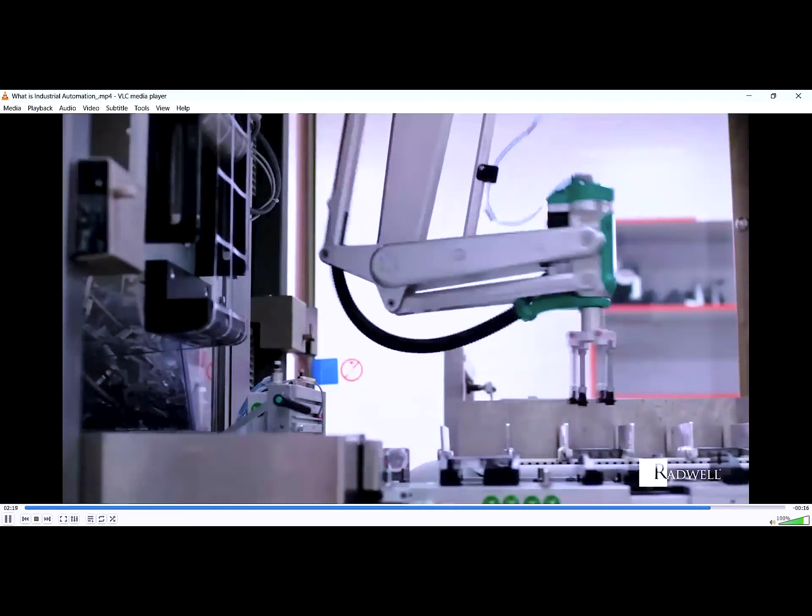Thank you, Nabil. Thank you. Now we are open to questions, and thereafter we'll follow with discussions. Professor Dr. Jamil has a couple of questions. Nabil, yes sir, yes sir.

No, there's no. Okay. Okay.

Now the next question is that you know South Korea supplied 4 large plants in Abu Dhabi. Are you aware of the implementation control exercised by any agency in Abu Dhabi? There are several agencies in Abu Dhabi and Dubai, but I am right now more focused on the project related to district cooling plant and water pumping station plant. I'm not in touch with those agencies or any institute working for that South Korea plant.